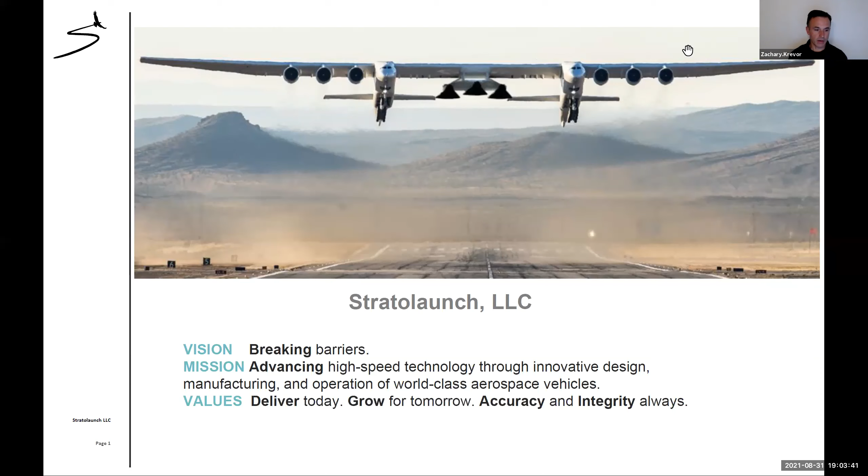So Ken, if you could go to slide 2, just a little bit about us. We have transitioned from ownership under Mr. Paul Allen. Our current owners now are Cerberus Capital Management, a private equity group that owns us. What we are trying to do is bring hypersonic test services to the aerospace community. We're fully funded through hypersonic flight tests. I think a number of folks are aware our facilities are out at Mojave Air and Spaceport, that is now our headquarters. We have transitioned from Seattle down to Mojave.

And as mentioned, that's our offering down there, and we have two great folks here to talk to you about quite a few more details. If you go to the next slide, Ken. I'll help Ken moderate here. Really, probably right off the bat, the immediate question: when are we going to fly? The goal is to fly the carrier aircraft again later this year, and the goal is to start our hypersonic flight tests next year. But all bets are off with COVID, just like everybody else - we've been significantly impacted by COVID, so that's my caveat for us there.

So we flipped around the agenda a little bit due to the flow, we have a lot of slides. I'll help Ken moderate it here. I think folks will hopefully have a very interesting time. I know we talked, I think 2 or 3 years ago, with one of our younger - I'm not supposed to say that, I guess, less experienced - engineers, but folks will hear from both Mason and Evan, who've been with the program quite a bit and were instrumental in the first flight. I think folks will really enjoy today's presentation. So with that, Mason, why don't I turn it over to you? Let's get going, I'll stop talking.

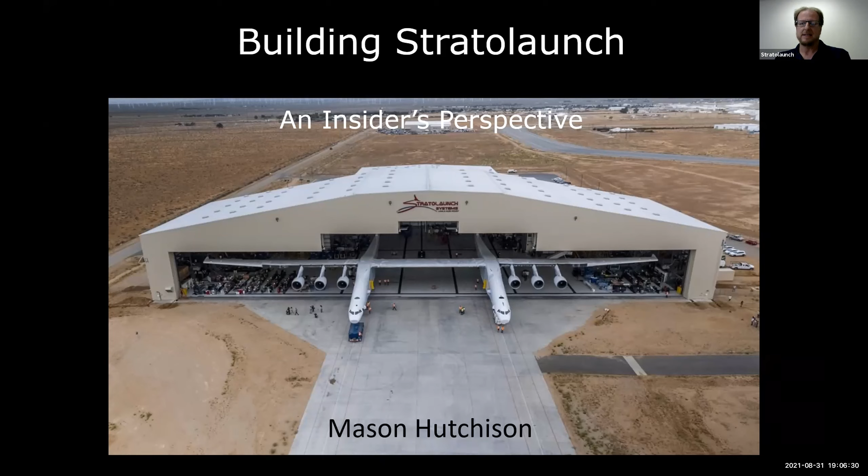I came on board designing the mechanical flight control system, and I've been here since the very first roll of carbon fiber fabric showed up to build the airplane, all the way through to today. So I've been present for each of the 2 flights and involved with the design and build of the airplane every single month of its progress.

I am a lifelong aviator and have got my roots in working in Mojave with Scaled Composites. I have a lot of experience working with landing gear and systems, so I'm a systems designer.

And what are we here to talk about tonight? I am passionate about the Stratolaunch carrier aircraft and being an engineer on the program. I enjoy getting to work on all areas of the program.

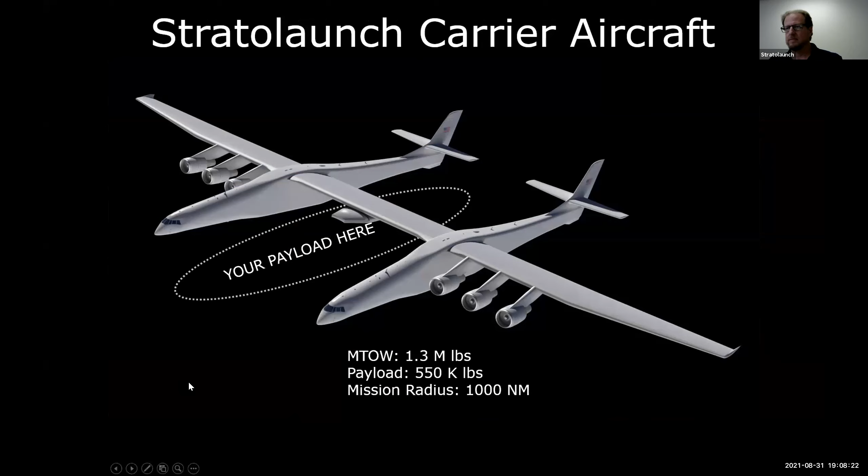So what's the purpose of this aircraft? Simply, your payload goes here. The original design of this airplane was to haul a payload, and it's an air-based launch platform that will make access to hypersonic test conditions more convenient, reliable, and routine. The payload is centrally located between two tall fuselages and under the wing, giving it the clearance for large payloads such as rockets to carry at a high altitude.

The baseline launch mission, when we first designed the airplane at the start of the contract, was to reach the capability of taking a payload on a 1,000 nautical mile radius. That includes two opportunities to loiter, before and after the release of the payload.

The Stratolaunch carrier aircraft, from the start of conceptual sketches until the first flight, was intended to carry rockets to an advantageous altitude that would allow for launching from flexible locations. That's the big advantage. The current program won't require the pull-up and release maneuver that you see here, but understanding the safe separation and careful mitigation of the associated risks with separation is where Stratolaunch shines.

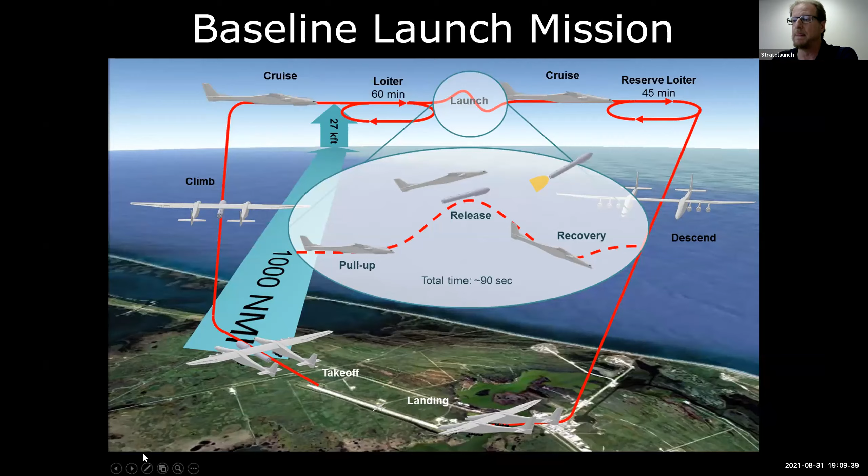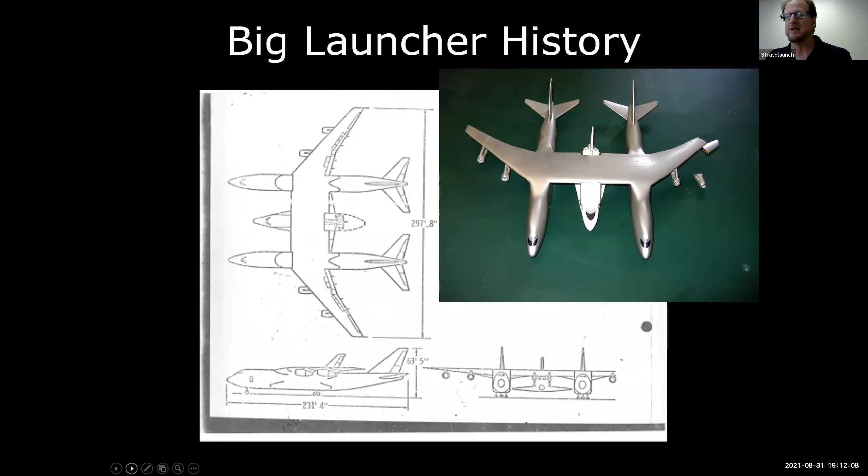So the top launch was deemed risky and more variants were offered in the process. Here's a shuttle carrying concept that moves the wing of the 747 to a high wing position, and notice there's a straight section in the center line span to simplify that connection. But still, extensive structural modifications is the obvious obstacle to this concept. I found this as a wood model on eBay that I really tried to win and I actually lost - neat little artifact.

So as the launcher progression of the history of launchers go, there became an economical aspect to building them. In this concept from 1974, as the shuttle is progressing, this was called the Conroy Virtus - fairly popular, searched on the internet. Hershey bar wing, which was theoretically easier to build and better for range. But this was a twin fuselage derived from B-52s and used the jet engines off of the B-52. Conroy said at the time that this would cost $12.5 million to build, which I say to that, sure. But look at that wing configuration - he's onto something here. And this theme you'll see play out as we go.

So let's talk about the evolution of launchers, and the evolution of this concept and design, from Burt Rutan's sketches all the way up till today. The configuration that we're flying actually takes an interesting path. I was able to gather some sketches that were made, casual ideas that were just archived over the years.

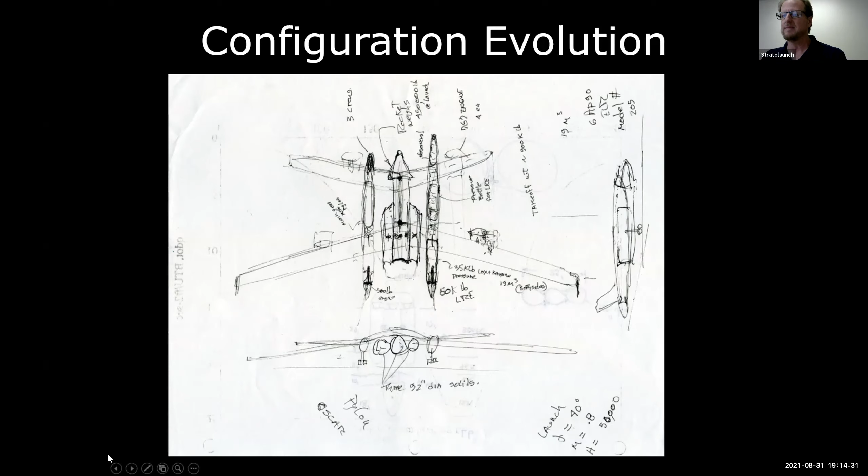Here's another iteration of that. Notice the SpaceShipOne sort of configuration - there you can see a SpaceShipOne, SpaceShipTwo style. But look, the crew is in the right-hand side of the right-hand fuselage, and we're starting to see ideas of how to reuse very complex systems like the engines and their nacelles. So you can see the spaceship platform emerging in this design.

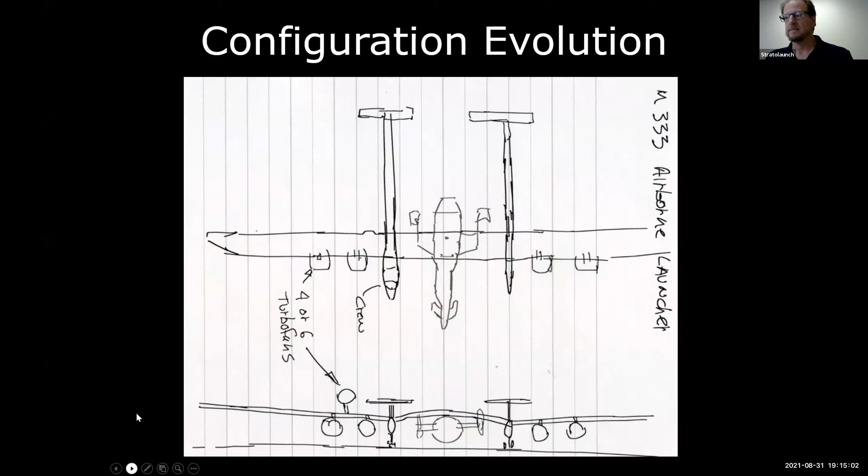Here's where it starts getting real. This is when more than Burt is just working on this - this is actual engineering applied to these ideas.

You start to see in this configuration there's a 277-foot span. We're reusing 747 nacelles, but the big concept here, the big breakthrough, is that this is going to start to reuse the major airline systems and components. That is the winning combination of this configuration.

Notice the crew layout in the right-hand cabin. There's actual thought Burt's putting into how the crew resides in that cabin to better accommodate the experience, and that persists throughout all of these.

So now that we're getting into this concept, we're starting to talk contracts, getting more of this. This is August 2000 - we're getting more serious, and we can tell because we've got a 3D model now, which means more people are working on it. Notice here in this configuration, minimize wetted area, but look at that landing gear.

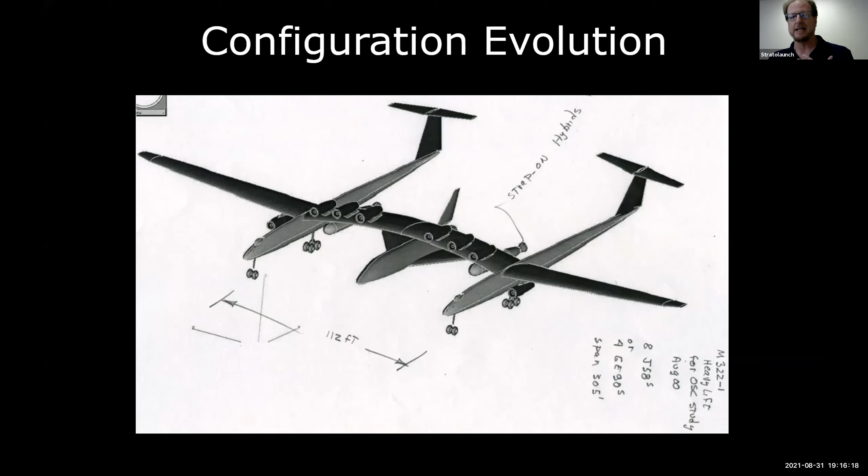That custom landing gear wouldn't be available from any donor aircraft. It's just too tall, and very clearly is going to have some cost issues. This note is from the 2000s again, this graphic.

So moving on, here's another pencil sketch that comes out. I showed this one because I think this is a very important sketch that Burt did.

It's not that Burt is simply a great aircraft designer - his approach to design is mission-centric, which identifies ways in which he can utilize unique design to fulfill the mission. It's not uniqueness for the sake of being unique; it's uniqueness to achieve a goal.

So Burt details here what he deems risky aspects of this design. The ground crew on board is in the nose. G-transients for takeoff and landing, and crew egress issues - he's addressing that here with the crew sitting up in the top of the vertical fin, at the joint between the horizontal tail and the vertical fin.

There's electrically signaled ailerons, because he's already identified that mechanical signaling through the tail and fuselage to the wings would be complicated. This one has a crew bailout configuration that allows a flyback vehicle. So there are some interesting concepts happening here. Also, the Bronco tail is really mostly for signaling runs, not necessarily structural in this configuration.

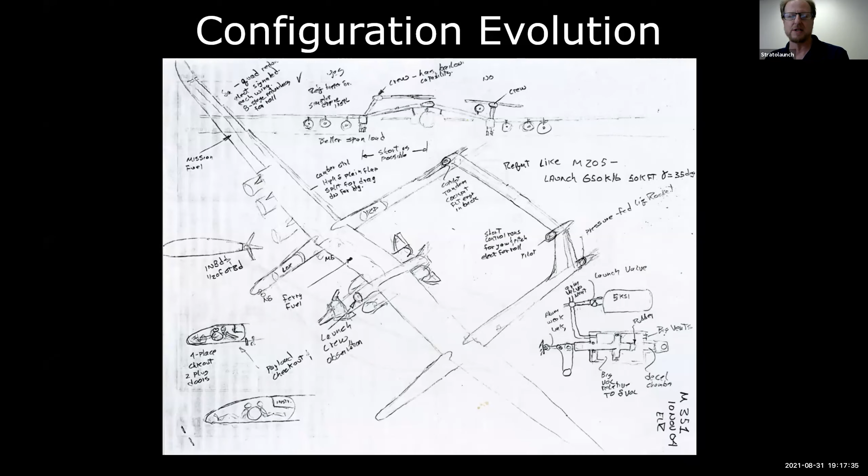So because we're Stratolaunch, and we are constantly looking for ways to advance schedule, that concept gets evolved into 6 engines - 6 747 engines. Notice the V-jet idea, which is an original scaled airplane.

The tail, top of the fin, has the fuselage from a jet that was previously manufactured. So there's a money-savings concept for using tooling from previous programs as the cockpit, sort of the crew station at the top of the tail.

Two SpaceShipTwo rocket engines for JATO-type takeoff, and a tapered outboard wing. This is where the donor starts to be targeted as the 747 in a serious way. This starts to get rolled into the plans and the concept for building.

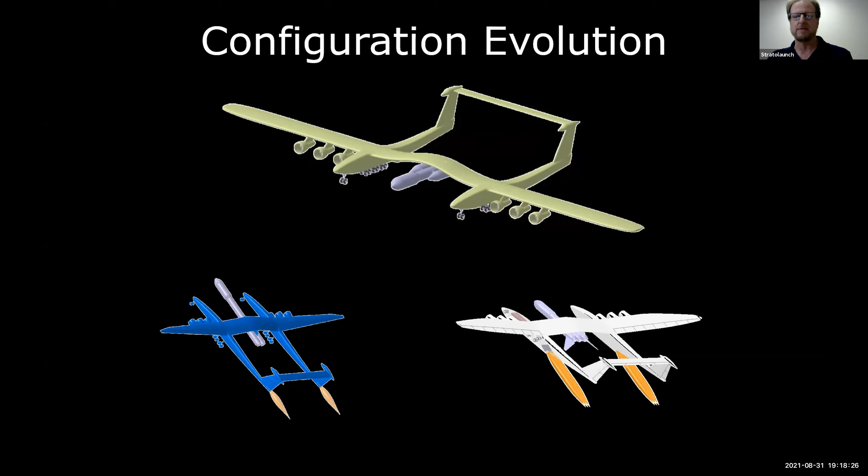So at the commitment of the contract of Stratolaunch, this is what the configuration was agreed upon. You can tell we've got a lot different jet now than in the days past. We've got the same outboard wing taper still, as you see here. The wingtip scheme is the same.

The engines are in the same place, but we didn't go with the Bronco tail. Many trade studies showed it actually was heavier than our 2 cruciform tail configurations that we have now. Multiple trades concluded that. Note the cockpit placement at the top of the fin. I like this particular concept because at this point we were toying with the idea of crew egress being an emergency slide through the vertical fin and out the bottom somehow.

That's completely unusual and out-of-the-box thinking that kind of made this advance. So as time passes and the design matures, we get to this configuration.

This was seriously traded as a configuration that would have the range and lifting capability, but we start to see complexities with using the systems. And we start to see economic issues with a curved wing section in the center that would be hard to build and expensive to build.

It's also interesting to note that these are modeled with basic-size 747 landing gear. So you can see this is a very large aircraft.

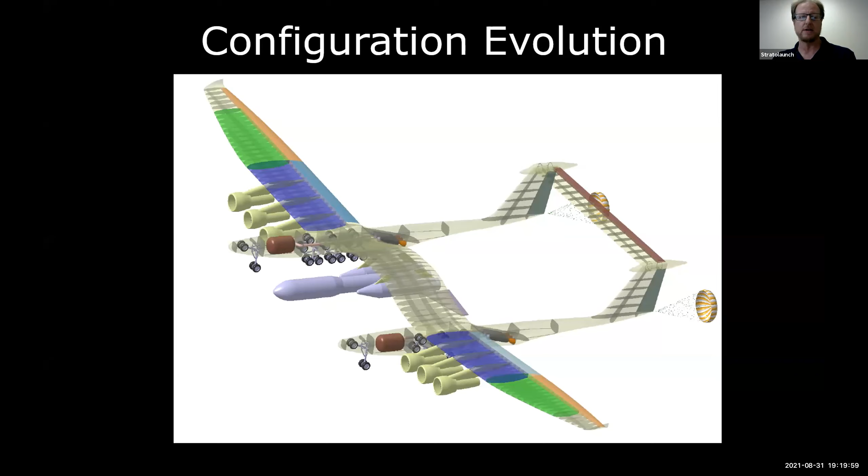Advancing in time, here's what we called the Horseshack project. It's a paper study that we use to bring our current configuration to finality. You can see the adoption of the 747 forward fuselage, the reuse of the windows from the 747, the engines, their nacelles and their pylons.

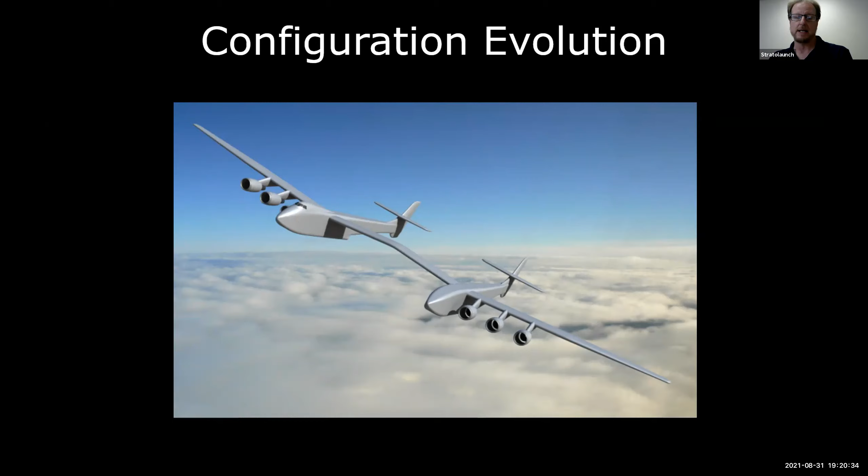And we've got the high horizontal tail in a cruciform configuration. But we have 2 different mold lines for the fuselages left to right. We'll talk about that in the next one.

So here we are today. This is our loft and our design outer mold line that we use to design the airplane. At this configuration, we have the launch pylon in the middle, just like all of them, but now we have identical cockpits left to right.

But for systems and for the control, the pilots have always sat on the right. That's been a carried-through configuration that we've not changed or challenged the entire time. But there are also reasons for that, such as reuse of the 747 windows into our loft, which I've always been impressed with—that we were able to reuse the transparencies from a 747.

So what is this aircraft now? How big is it? I like this 3-view because it shows we're 385 feet wingspan, 238 feet long. Max design takeoff weight is intended to be 1.3 million pounds. We haven't tested to that point yet, but we are definitely using the airplane with the intent to build up to carrying more weight eventually.

The current mission is not nearly the payload that was originally anticipated for this airplane, but the system complexity is challenge enough. The mission radius was maintained at 1,000 nautical miles and a balanced field length of approximately 10,000 feet.

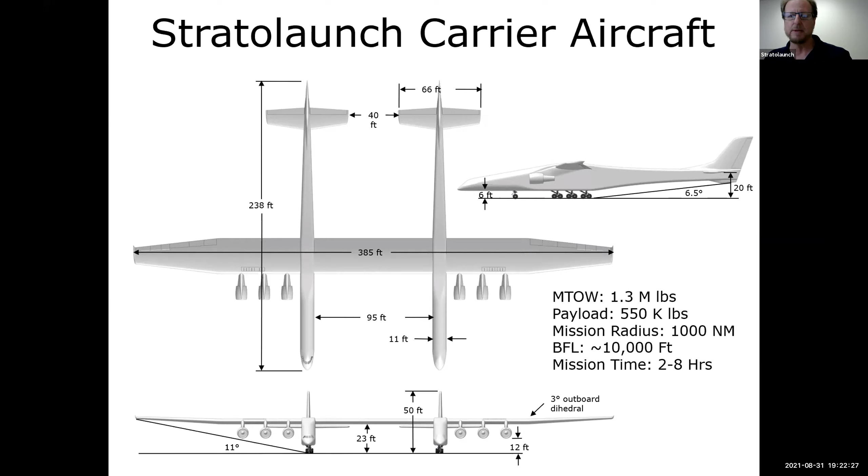We think that we also have the world's largest single aircraft component, which would be the wing spars, which are only partial span. They go from the dihedral break or the planform break to the other planform break. We have not been informed of any other piece bigger than this, but they are approximately 250 feet long each, the spars and the wings. So we think that's the single largest aircraft component ever built. We'd love to hear from you if you have a challenge to that.

All right, has anyone ever seen this chart? I like this chart—someone did us a favor by making it. I found it on Wikipedia, and it shows this Model 351 Stratolaunch overlaid over a 747, and at the same time, the Hughes H4 Hercules. We beat the H4 Hercules by 65 feet, incidentally, a number that I don't ever forget.

Here's a look inside the Stratolaunch aircraft as it is now, and you can ignore that payload in the middle. I grabbed this drawing because it really does show what our system's complexity looks like. There are 4 hydraulic systems, almost a quarter statute mile of control cable.

Each engine has an air-driven hydraulic pump, an engine-driven hydraulic pump, and an electrically driven hydraulic pump, together making more than 200 total horsepower of hydraulic service to the flight controls, the landing gear, and the braking systems. Each engine provides electrical power, and they pump it into 2 massive power bus systems that meet at the center wing.

No, it is not possible to access the fuselage or convey through the wing while in flight. The pilots are sequestered only to the pressure vessel of the right forward cabin and are unable to actually transfer into the fuselage while in flight. But that said, you cannot walk through the wing either. The wing is only about 5 feet thick.

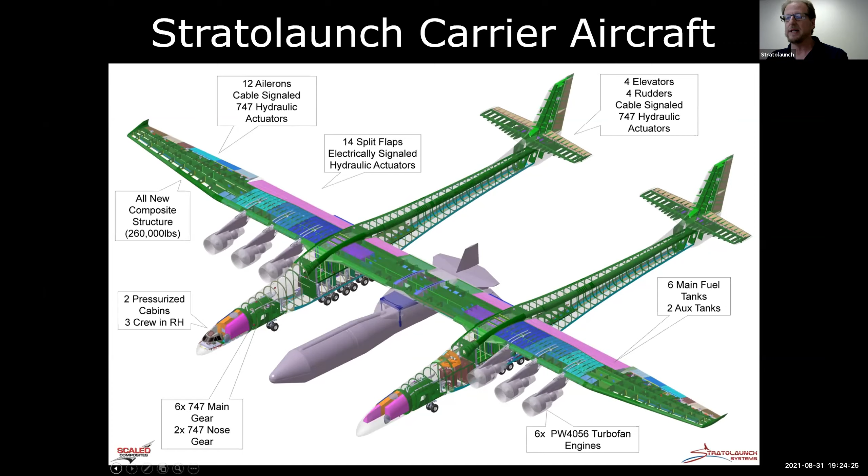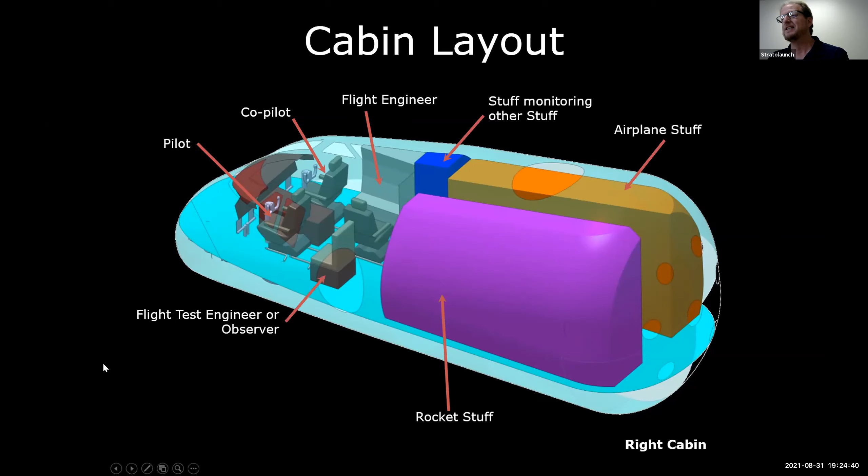Definitely a benefit. Here's the cabin layout, and it's pretty simple. It follows the basic 747 layout with a pilot, co-pilot, and a flight engineer, and other stuff monitoring other stuff. We call that airplane stuff. We call that rocket stuff. Literally, these are the support systems for the payload and the experiments that can happen on board.

We have an optional seat for a flight test engineer observer. We haven't put that in. It's just kind of close to the door. And of course, we tried to build a lav for the pilots. Sorry about that, we just ran out of time. So instead, we got a TravelJohn.

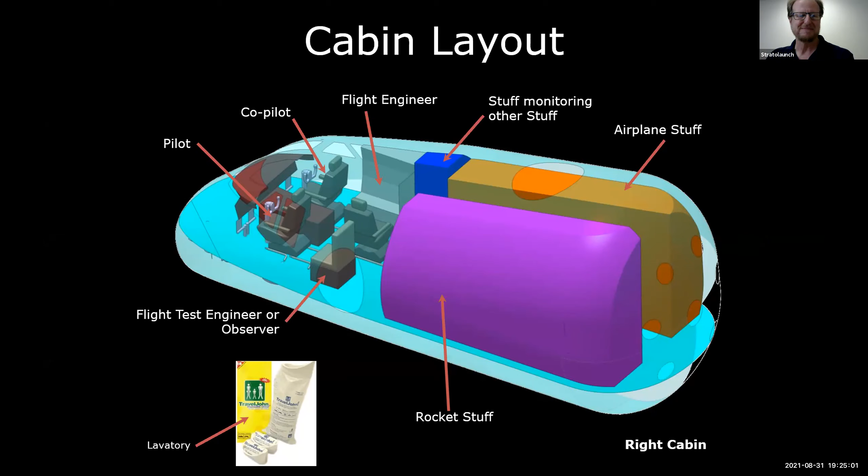So where were these airplanes originated from? Parts birds. We bought 2 747s, lightly used and in good condition. We wish they were from Craigslist. We like to say they were, but they were a little bit more legit than that.

We accepted the airplanes in flying condition, and the day they rolled in, had a company meeting on board. It was very intimidating because we stood there looking at the airplanes, wondering, knowing we have no business harvesting the systems out of these massive airplanes and putting them in something so big. Having been, White Knight 2 having been the largest aircraft any of us had ever built.

Of course, we took many of the flight deck components, and in the end, this is what our parts bird looks like before they get hauled to the boneyard. No engines, very few systems, and minimal landing gear to transport it.

The 747s donated their entire cockpit floors, controls, seat rails, instrument panels, and they eventually became the simulator, the cockpit floor in both cabins, left and right. We used the same yokes and rudder pedals from those harvests. And these are how the donor airplanes were, their fate. They were sent to the boneyard and reduced, as they say. Only one exists today, and the other one is basically gone.

So I like to go through 4 basic tenets of building Stratolaunch, and this is an effort to show kind of the basic philosophy that we had while we were on this massive, overwhelming project. Number 1, keep the requirements focused. This elevator goes to this horizontal stabilizer. That day, we mounted these 2 and set the hinge line.

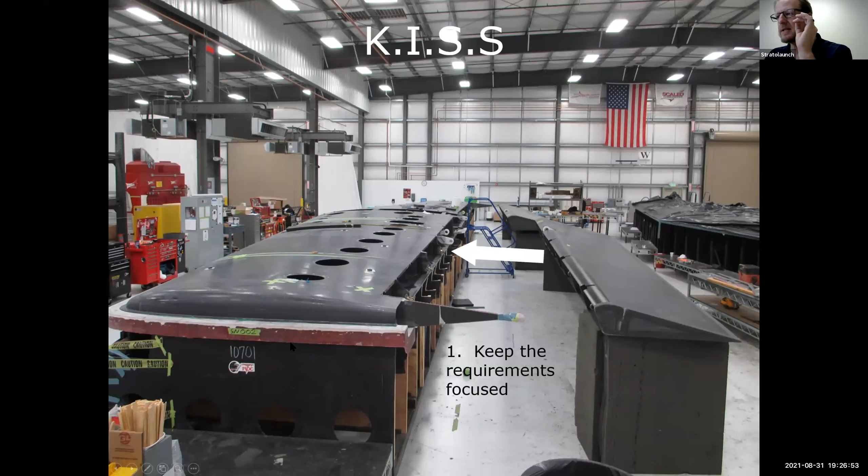Simple, clear requirements. Build flat parts when you can. Curved parts are hard and take tools and take time and expense. Flat parts, you can make them over and over again on the same table. So that kind of explains why the fuselage sides are mostly flat.

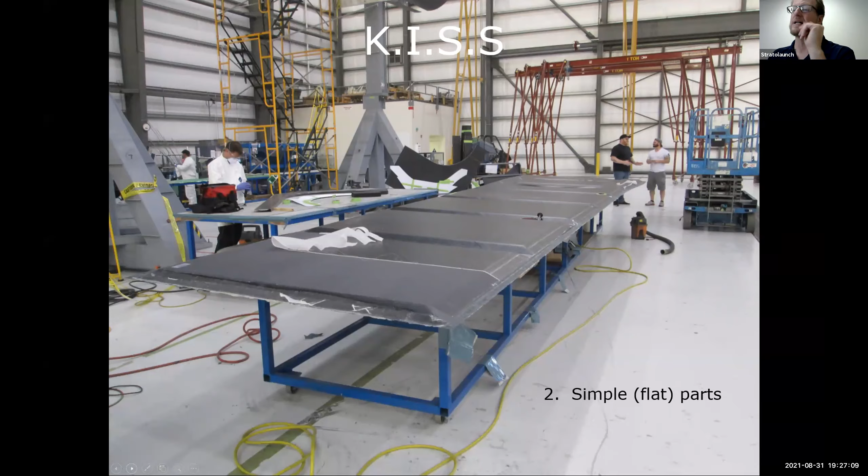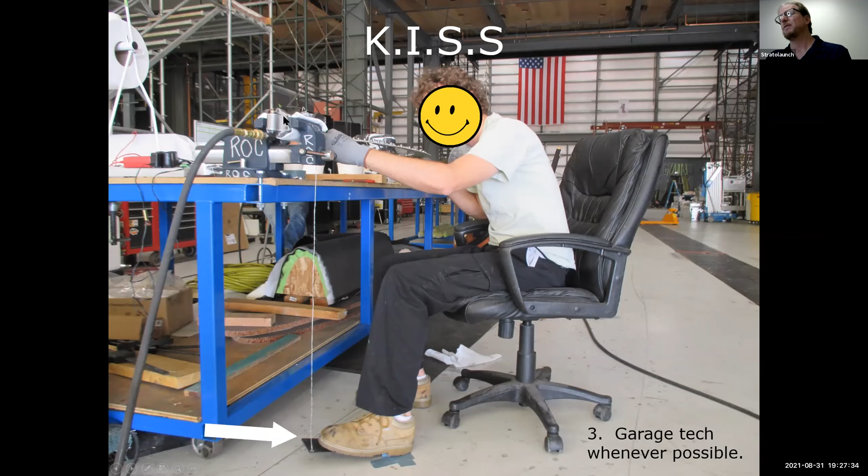Use garage tech whenever possible. This is one of my favorite images because when tools need modification, they need modification right away, and we don't like to wait on new tools. And what good is a brand new rivet gun in the tool crib if it has the wrong configuration? Make it the right configuration and get the job done. Notice the pedal actuating a rivet gun with a string that's duct taped to the floor. One of my favorite modifications of tools.

In this photo, you see a spar cap that was over 250 feet long, part of what we think are the largest aircraft parts ever made. It was very long and floppy.

It was nearly impossible to flip upside down. So someone smart came up with a machined foam wheel that had facets that we could roll across the floor and work on any side of the spar cap that we needed, without putting undue torsion on the part itself. Pretty great idea. So those are the four tenets of keep it simple.

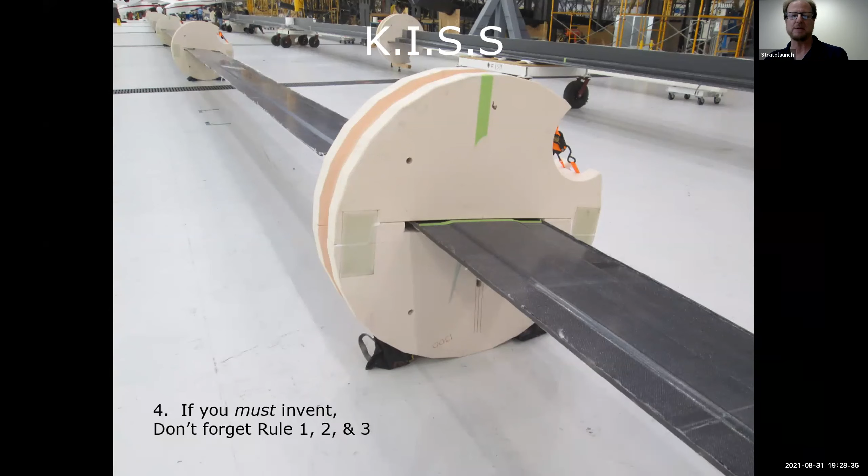Let's talk about the assembly of this. I'm a model airplaner and I look at it from that point of view. We put this airplane together just like a model. That part goes there, pretty simple. And it was a daily occurrence to see huge parts go into place.

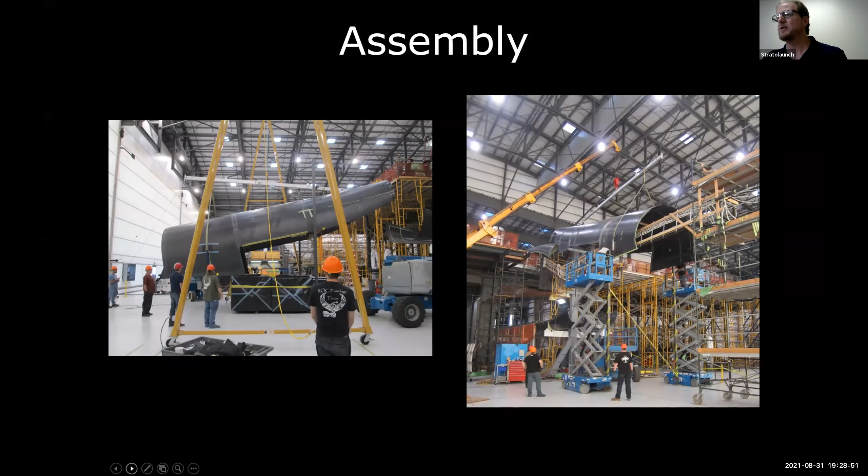In this picture, you'll see the tail section, the entire tail section, vertical and horizontal, put together as an assembly first on the floor, and then as one giant assembly moved into place in a very impressive lift. We did this twice, once for each tail.

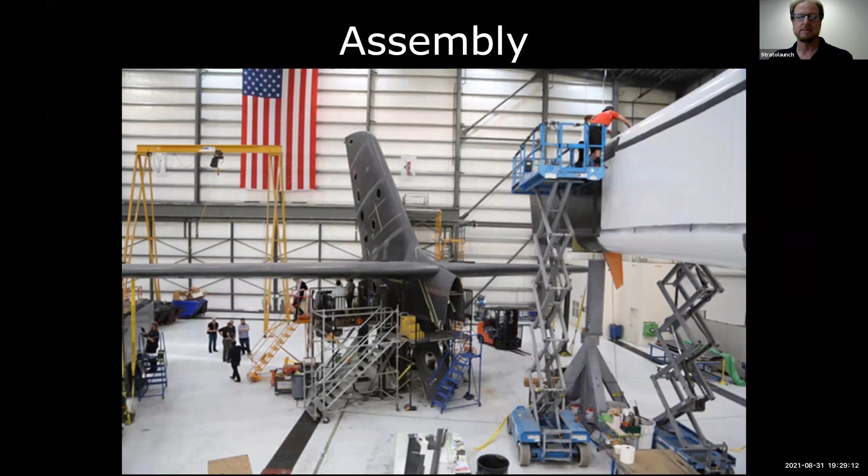Just for scale, I love this picture. Looking down, we actually had a drone in the hangar this day, and this just shows a couple of people standing there for scale. Walking on the wing was a routine, everyday way of life, and it became so routine that we often forgot we were walking on an aircraft structure.

Also, when you adopt systems from well-used airliners like 747s, reusing the engines and nacelles means you get to use the commonly available hoists and engine lift hardware for installation and removal. But oh wait, the 747 has dihedral, and these hoists needed modification to make that work. So, oops, you learn as you go in this game, and that was one of the fun lessons I was most admirable of, how they adapted to the lack of dihedral in our installation. They still use those engine hoists to this day.

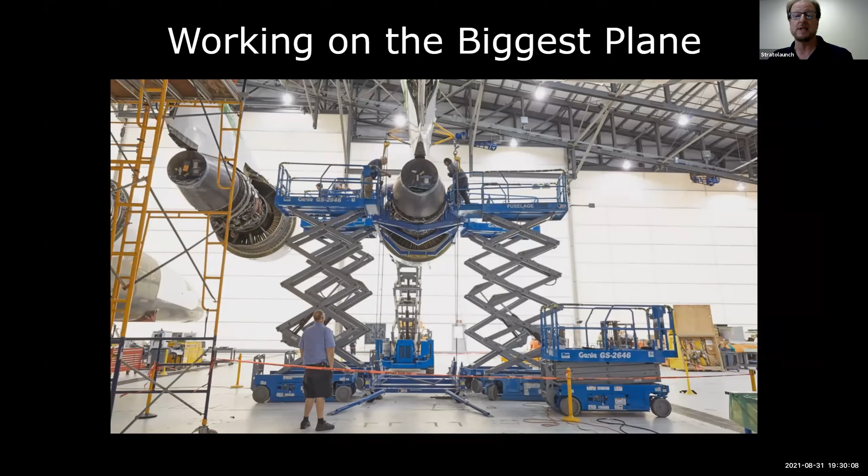Also, simulating this airplane is a big challenge. It started off as a basic sim in the hangar, and we made it bigger by trying to add in the instrument panel and other cockpit elements. Today we've settled on a fixed base simulator inside a hemispherical projection dome, and it works remarkably well. It's so interesting how the brain and the ears just feel like you're flying in that. The systems are quite well represented in our simulator, and it's used all the time for pilot training, proficiency, and also proficiency in our control room.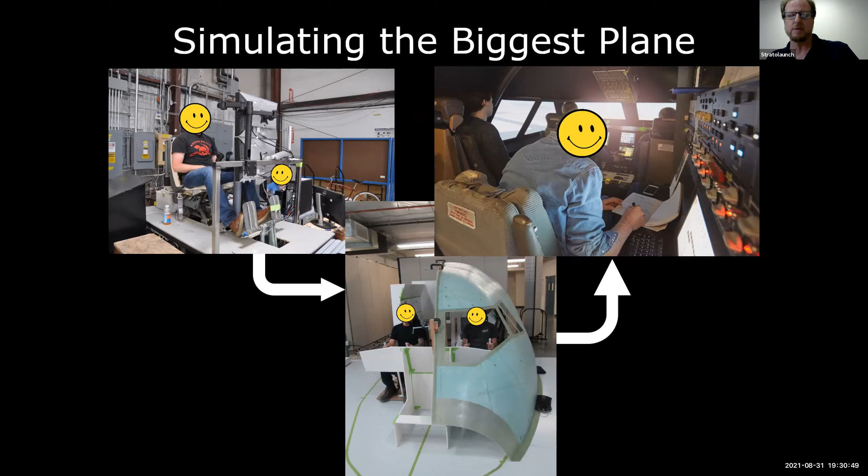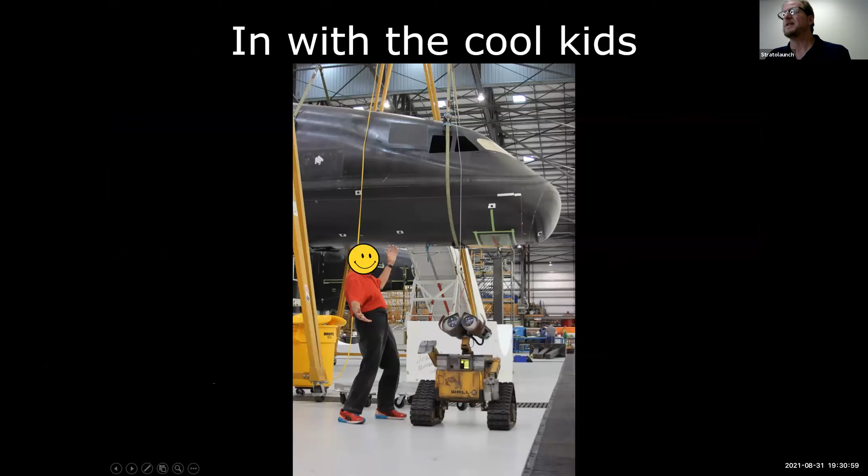Let's talk about the hardest parts of building this airplane. This is the last part of my presentation.

The wing was built thin for range and straight for cost. The biggest challenge of this airplane was the wing root and the design of that wing root. The maximum bending moment is equivalent to one elephant mile. If you know the concept of foot-pounds and torque, the elephant mile is a massive amount of torque, and that's an adult African male elephant, by the way. We had to qualify that once.

Also, some of the hardest parts is understanding how this airplane is different from others. It's what makes this job interesting. On the first rollout shown here, we were very concerned with skin temperature from solar heating. So we placed tattletale thermometers all over the airplane in this picture, and that experiment happened just on the rollout of the aircraft.

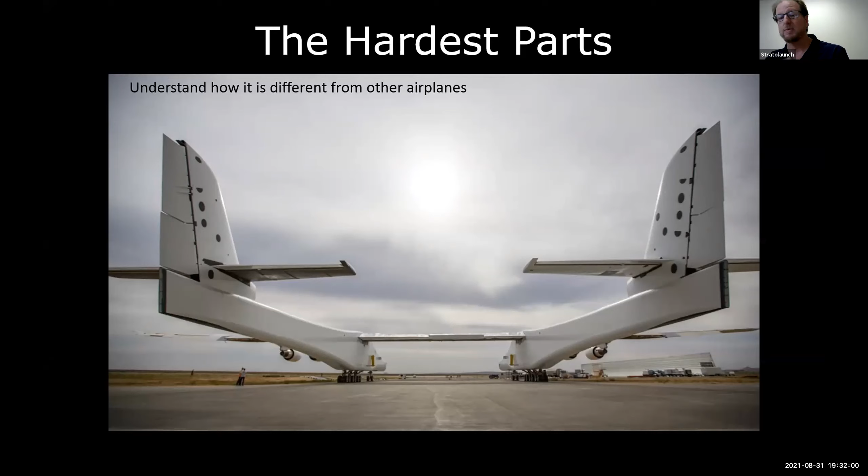Another hard part of building this airplane is moving the airplane. This was set up as kind of a joke, but it's actually something we talked about, moving the airplane by using a crew of people with a rope. It was floated.

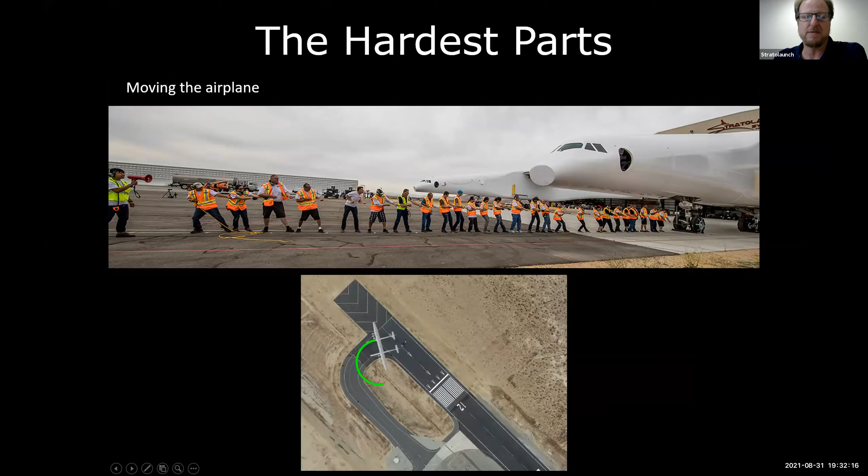Accessing the airplane - I like to show this picture because it shows I actually took this picture from the other tail, and I'm up in the high scissor lift there. It was actually hard to find scissor lifts that would reach the top of our tail, and when we did, we had to get the ones that went really high. So there was this confronting of fear of heights, and I actually went through that on this program. I went from hardly being able to climb up a ladder to being able to ride the scissor lift up on a daily basis.

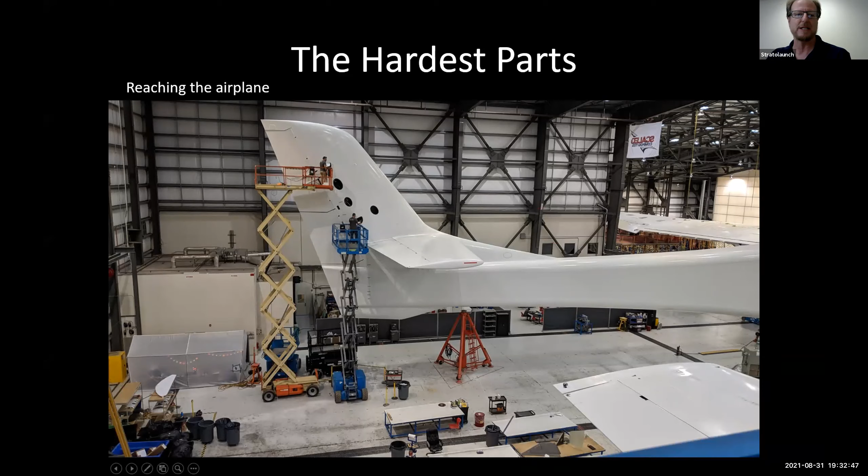We had to develop an entirely new body of technology and use that technology concurrently while we built. In the image on the left, those pins are 4 inches in diameter, and that's a shear load test for one of our wing sections. Probably, I think that's a shear panel, actually. At the bottom, you'll see the semi-truck trailer used just to move the wing test article.

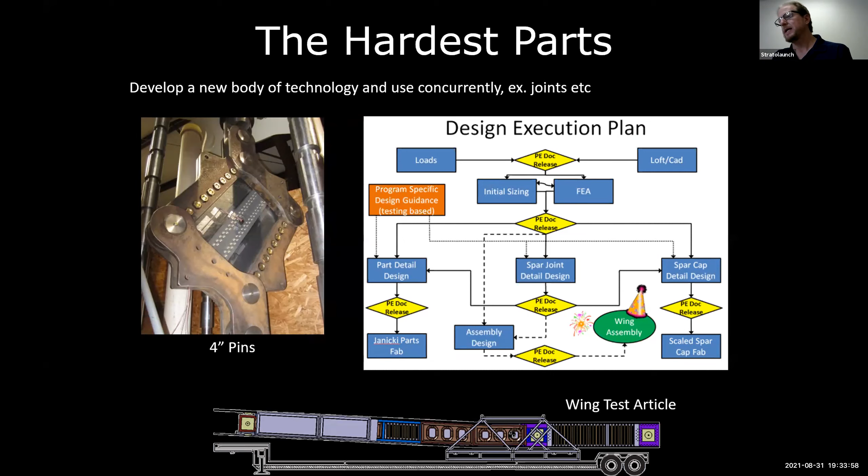So designing the systems for which we build things became part of this project and really took on a life of its own.

And of course, the big emotional paycheck. It happens that every day we live a life of being constantly behind schedule and needing to make many, many decisions every day, but there has to be an emotional payoff. Very clearly and very distinctly, first flight was that day. 2.5 hours of flying, 17,000 feet, and one fantastic landing at the very end. And truly, this is, in conclusion, the payoff, and this is why we do this.

So what's next for Stratolaunch? I'm just going to touch on it. We thought we were done building the airplane. We're not. There's still plenty more to go. More systems expansion, capability testing. We've got plenty of ground tests ahead of us as we implement a launch pylon and a hypersonic payload.

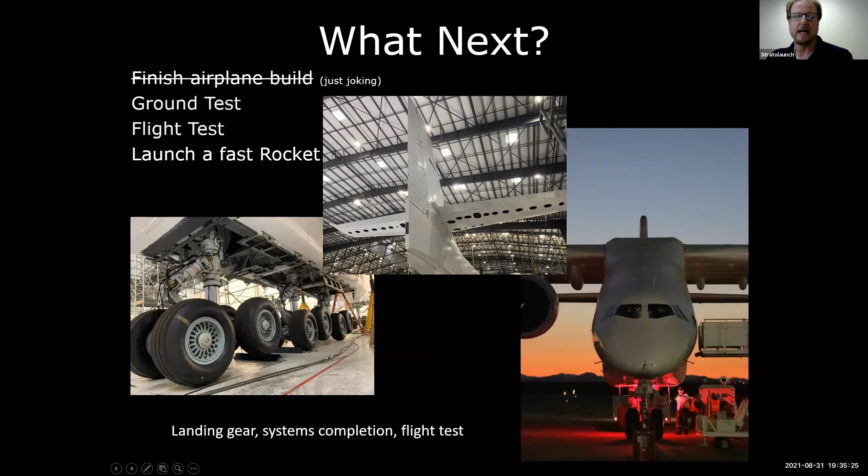We've got plenty of flight tests associated with that. And then in the end, we're going to launch a fast rocket. And that is going to be one fantastic day.

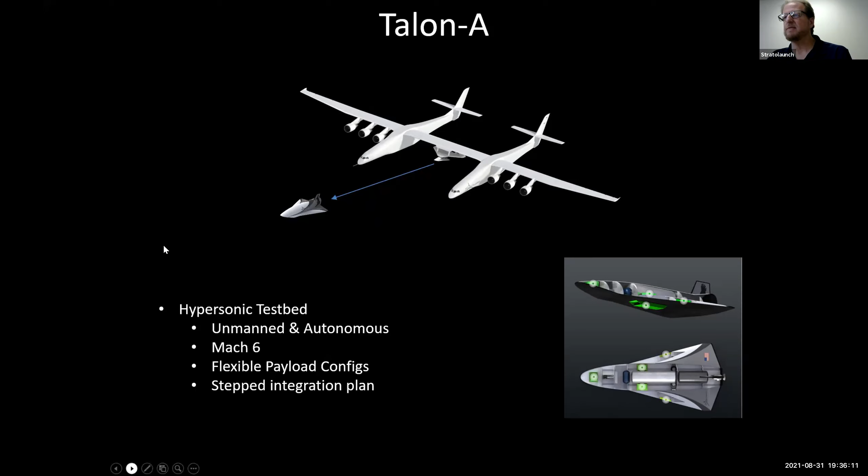This is my last slide. I just want to say that this is just getting started. This really does demand an entire presentation of its own, but this is a basic overview of what our hypersonic mission is. And with that, that is my last slide, and I am ready to hand over to Colonel Evan Thomas.

Just excuse us for just a minute while we switch seats.

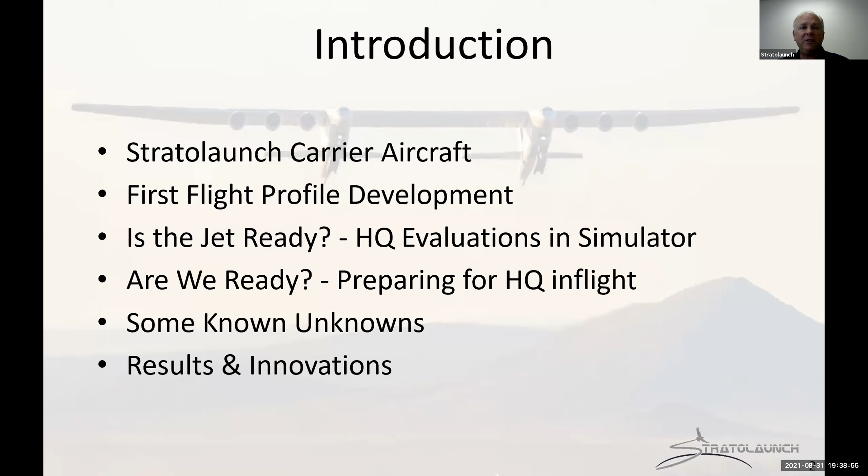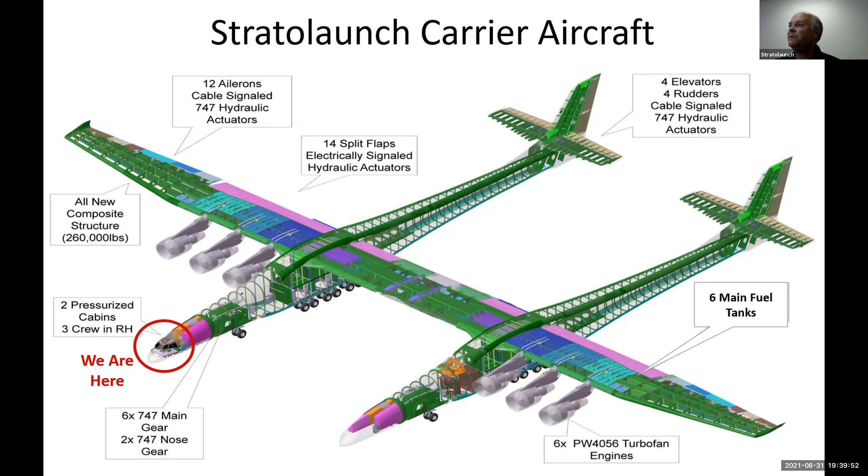In terms of flight controls, I'll go over this in a bit more detail. For the first flight, all of our flight controls were mechanically signaled via cables—cables running from that right cabin all the way out to both empennages, all four elevators, the four rudders, both banks of outboard ailerons on both sides. So a lot of cable. All the flight controls, of course, for an aircraft this size, are hydraulically actuated and irreversible. As a review, we have basically two elevators and two rudders per fuselage, and then two banks of ailerons on either wing.

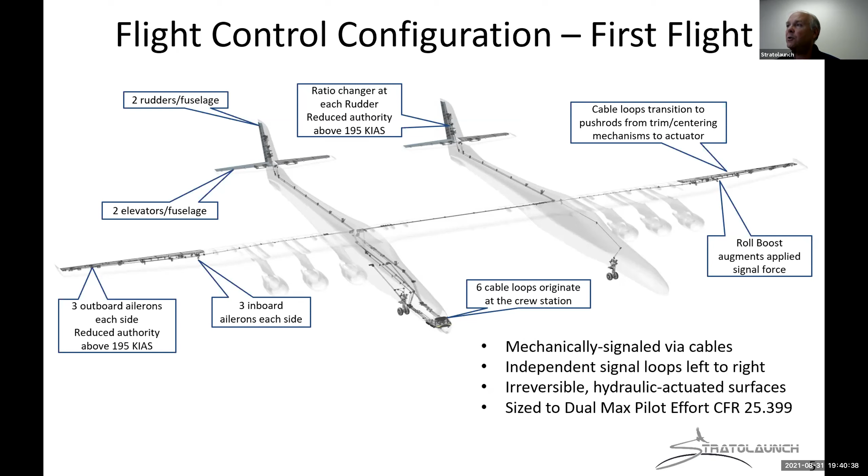So the first flight really had one objective, like all first flights, and that was to land safely. We had a bunch of other sub-objectives, but really that was the main objective.

The risks we looked at for the first flight—the primary one was landing this airplane quite wide on the runway, so runway departure on landing was a big concern. But also, how was the airplane going to fly for real? So inadequate stability and control, the possibility of getting pilot-induced oscillations, and then also, it's a very large carbon structure, so the possibilities of getting some odd structural vibrations, biomechanical feedback between us and the aircraft and the control inputs, and then pilot perceptual concerns of sitting there out on the right fuselage way out in front. Ultimately, the first flight was about: can we precisely control the aircraft to a stable, centered landing?

Going again on that big landing challenge—we've got a 200-foot wide runway here at Mojave, and it's 114 feet from the outside of one set of main landing gear to the outside of the other set. So we're pretty wide there, which gave us about 43 feet to either side to play with. Again, we're a bit like a shopping cart—two nose gears up front, and then inline main landing gear, three trucks worth of six tires on each line. We also come into the flare a bit nose down, sort of like a B-52. So that concern was such that we didn't want to land nose gear first and start porpoising—not only fore and aft, but potentially side to side as well. That would be a bad thing.

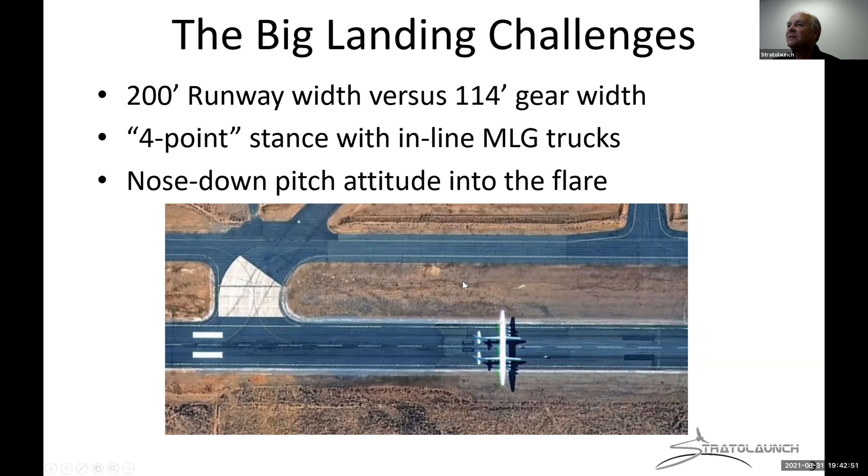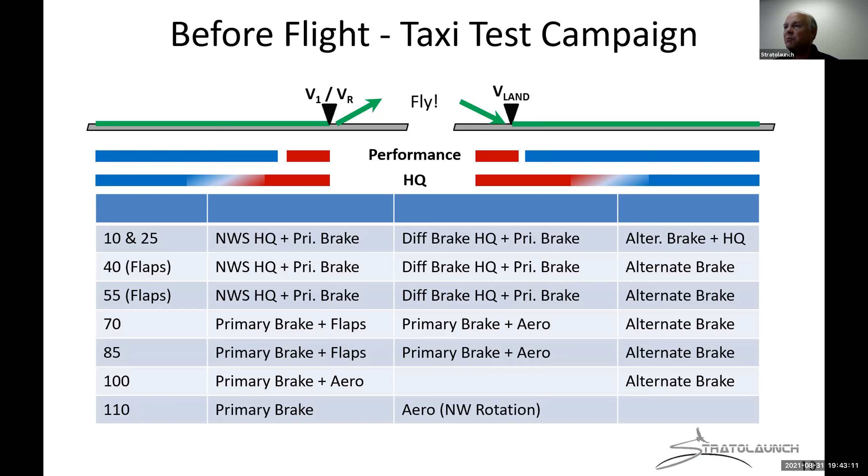I was going to talk a little about our buildup in taxi testing, but I think I'll just skip ahead—in case there are any questions about that later, we can double back to this slide. Needless to say, the taxi test program for this airplane was not just 'let's take it out a few days prior and run it down the taxiway.' It was a fairly long and involved process.

So it came time now to think about this first flight and what we wanted to do. We started with handling quality evaluation basics, which has four primary steps. First, you want to do thorough ground tests so you understand your system, the flight control system. Next, when airborne, you want to do some open loop responses, see what the aircraft's natural response is to inputs, and some basic capture tasks, bringing the pilot into the loop. Then you want to build up to doing high gain, intense, quick, rapid inputs to do a stress test—that's where we're looking for what we call a handling qualities cliff, or any sudden degradation that would be very bad to learn about right during the landing. So we want to look at it up and away at altitude. Finally, you'd normally assess the handling qualities and workload for mission suitability—but on a first flight, we did not care about that, so that one was off the table.

This essentially led to a basic profile: we're going to climb to 15,000 feet, a nice comfortable altitude, 150 knots. We take off with the flaps up. We're going to do pitch, roll, and yaw maneuvers to check the handling qualities—nothing high gain, flaps up. Then we're going to put the flaps down, which was a significant test point to get done. The flaps, by the way, have two settings, up and full down, which is 70 degrees down. So the flaps act as flaps, but they also act essentially as speed brakes.

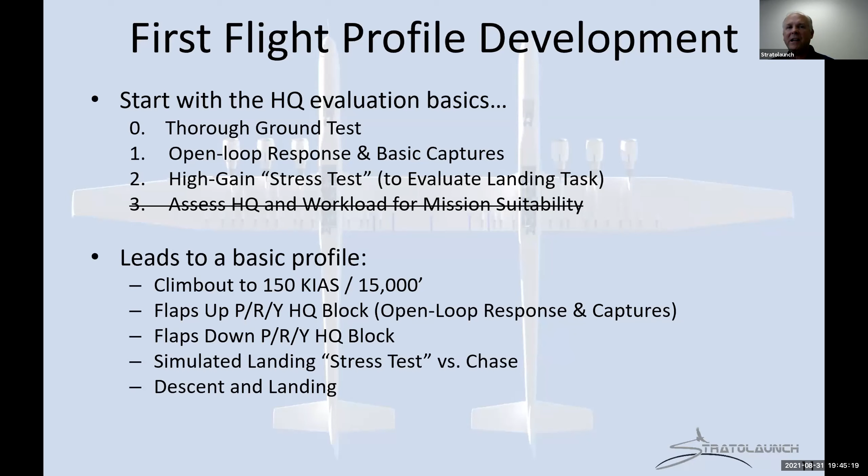Once the flaps were down, then we were going to do our simulated landing stress test. Typically, you would use that with your chase aircraft as a target out in front of you, and then descent and landing. As we started thinking about exactly how we're going to do this, it became rapidly obvious that this was going to be an iterative approach.

So we have our standard approach, but there are a lot of unknowns here, and one of them is our air data system. Is it in any way accurate? We sort of need to know that before we come back to land. So the first thing we needed to do is add some pacer checks in here to check the pitot statics and look at our predictions. How is our AOA prediction, our coefficient of lift, our trim elevator settings? So we want to look at those, both flaps up and flaps down.

Then next up, we said, if we have a problem early in the flight, we want to get back on the ground quickly. We want to get the flaps down. But before we put the flaps down, we want to make sure we have enough roll authority in case we have an asymmetric flap or some sort of problem with the flaps. So that meant we had to put right up front: we'll do our pacer check, but then we need to go check our roll authority and our roll handling qualities. No problem, we'll just rearrange the plan and put that in place.

Then when we started looking at doing these roll maneuvers, the roll authority maneuvers, where we're essentially doing them both feet on the floor with some coordination, we realized there was a potential to build side slip there, which we had not looked at before. And doing an open loop side slip maneuver was not a safe or smart buildup. So we'll add in a flaps up, wings level side slip to take the airplane to the maximum side slip we predict we'll see in the roll handling qualities. And then we'll do our roll authority check, and then our handling quality check, and then we'll get the flaps down. So you can see how this profile slowly built over time.

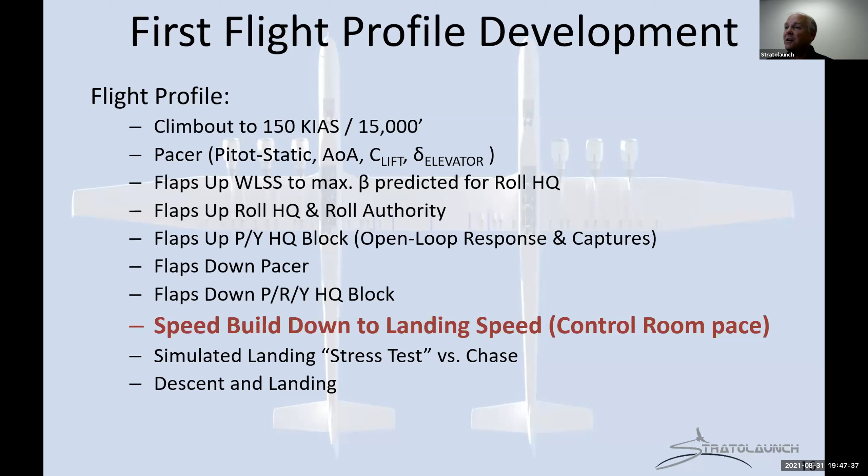So that came in. And then the next thing was, how do we add a little more stress to this stress test, or make it harder, more like the actual landing? I used to work with a guy who always said, when we're looking at handling qualities, if something's worth looking at once, it's worth looking at 3 times. So we upped the number of simulated landings we were doing at altitude. We threw in a side slip component during those simulated approaches. We got rid of the idea of doing this off of chase because we're just far too big and it was a little too scary for all of us. And we also added in some planned low approach, one low approach with the option to do other low approaches prior to the landing.

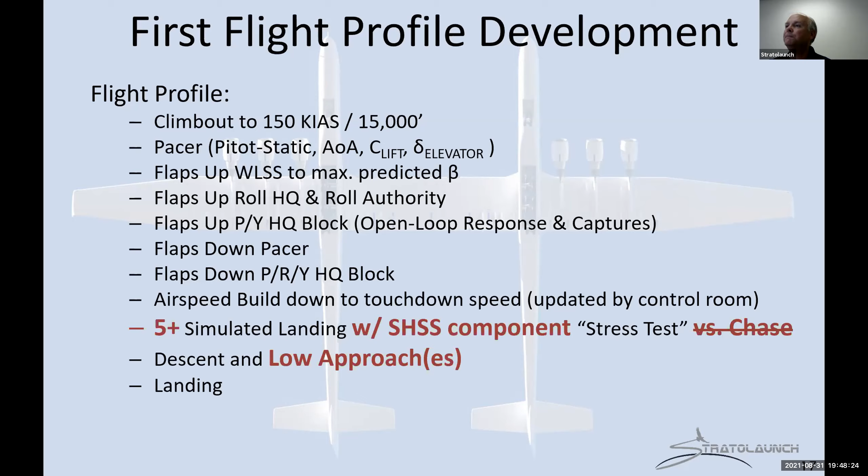So that's what the essentials of the first flight looked like. We drew some lessons from that process. Number 1, on a first flight, everything's an unknown. And lesson 2 from the aircrew side: follow your instincts. What scares us the most is what we want to look at.

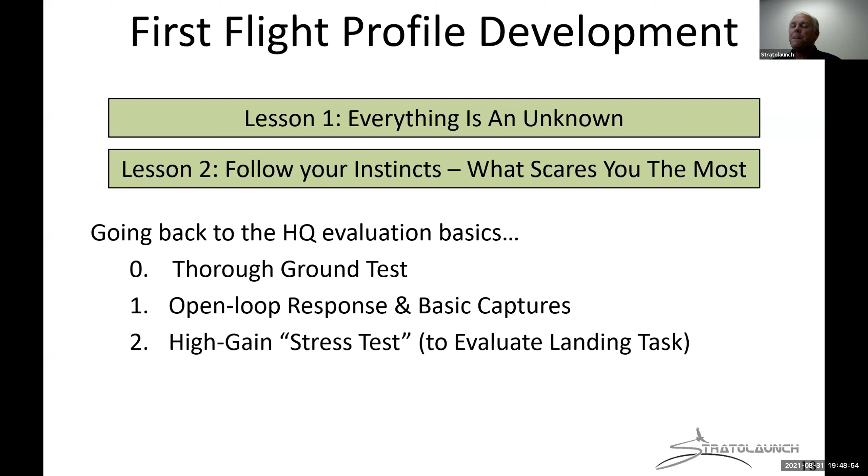So if we back up to those handling quality evaluation basics, we're going to talk a little more about the thorough ground test and building this up. But before I do that, I want to touch very quickly on how do you evaluate handling qualities. I'm pretty sure if we had a car out in the parking lot, and we handed you the keys and said, go tell me if this is a good driving car or not.

If you ask that to 20 people, you will get 20 different opinions. So the challenge of how do you standardize qualitative comments and avoid design by opinion was a major problem throughout flight test and aircraft development, really until the 60s.

It started getting much more scientific, with the advent of the Cooper-Harper Handling Qualities Rating Scale, which relies on a very tightly defined task, which is repeatable, and the pilots can train to, so that you take variation out of the loop there. And then you set desired and adequate criteria.

And then you execute the task, and then you grade it against this scale, and typically end up with 3 levels of rating. One is satisfactory without improvement - the plane's good for the mission. It's adequate with a tolerable workload, so it's okay, but it could be a lot better. And then level 3 is, well, it's controllable, but you really can't do a mission with it.

So with that background, we'll go back to that thorough ground test. As we completed the build on the airplane, which, as Mason said, was quite a task, we discovered that the pitch, breakout, and friction forces were significantly higher than the design point was, and certainly higher than any of the previous hangar or bench testing had revealed. In fact, comparing it with mil standard specifications, which break out different breakout or friction forces into level 1, 2, and 3, we were above level 3. And it turns out we were pretty much up there with roll and yaw as well.

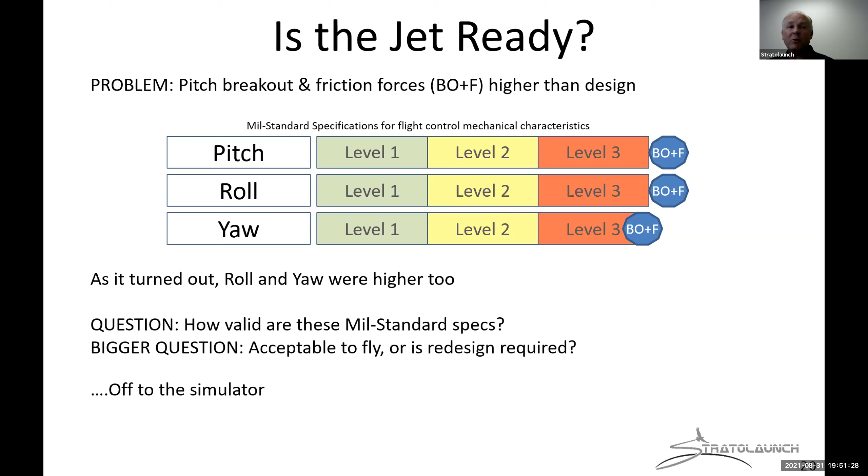Which brought up two questions. How valid are these mil standard specs? Because they are very oriented towards high performance fighter and trainer aircraft, not really a large lumbering transport. So that was one question, but the bigger question was, is this airplane acceptable to fly, or do we need to do some redesign? So now it's time to go back to that simulator that Mason talked about and find out, is this jet ready to fly?

So our objective was to evaluate the as-built flight controls for the first flight. Our handling qualities task was very simple, straight in landings. We didn't need to do any fancy offsets or anything like that. This airplane's handling qualities are difficult enough that a straight in was it. And we had a performance criteria fairly straightforward, our pitch attitude at touchdown, because we were focused on pitch at the time.

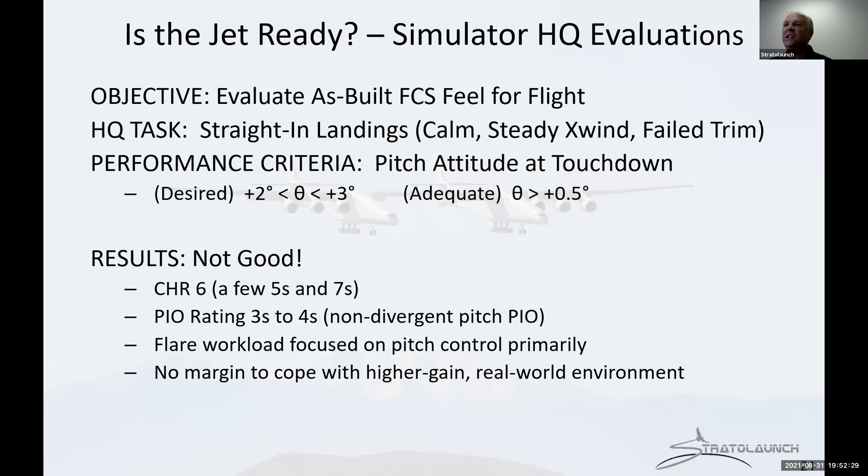Our results were not great. We had Cooper Harper 6 as our average, so we're borderline level 2 into level 3. We also saw a number of pilot-induced oscillations, non-divergent pitch PIOs. The flare workload was very high, focused on pitch, and we assessed that we had no margin to cope in a higher gain environment, which is what we'd see in the real world versus the sim.

Looking at a few traces of what this looked like. On these traces, time is on the horizontal scale. If you look at the second set of data here, that's pitch inceptor or yoke forces. The orange one is noted as pitch friction band. You can see there's a lot of sawtoothing and back and forth - that is the pilot going back and forth across this friction band. Basically, every time you reverse direction, you have to push across the friction band before you get an elevator response. And also due to a number of things, the signaling delay through the cables and all that, and the actuator is actually quite low, but the inertia of the airplane tended to lead to this delayed response. And we see here the pilot getting out of phase between pitch yoke inputs and the pitch attitude response of the airplane.

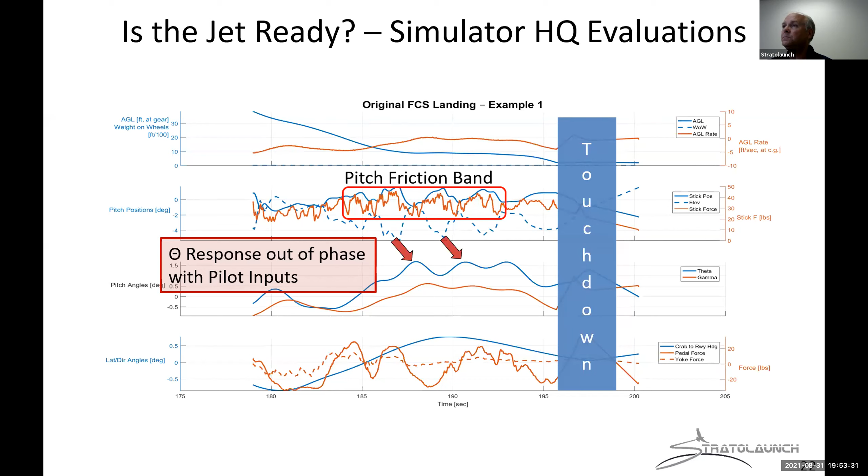So out of all this, one, handling quality simulation was very important for this flight readiness decision. We knew we had to do something different, but now the question is, well, how good is good enough? So we decided to relook at those tasks.

We wanted to give ourselves tasks where we were happy we had adequate control plus some margin for what this would look like in the real world, and sufficiently tasking to expose deficiencies in the simulator. Landing was the critical task, but we also added in some up and away single axis high gain tasks as part of a stress test.

We also picked 3 primary criteria to go after. One was runway lateral error, clearly a concern when you only have 43 feet to work with to either side, you don't want to be landing 30 feet off to the side. Having a positive pitch attitude, so we didn't touch down nose gear first. And then how well we aligned the fuselage with the runway. This aircraft, because of the inline nature of those main landing gear, we want to land with the fuselage aligned with the runway using a wing low approach as opposed to a crabbed landing.

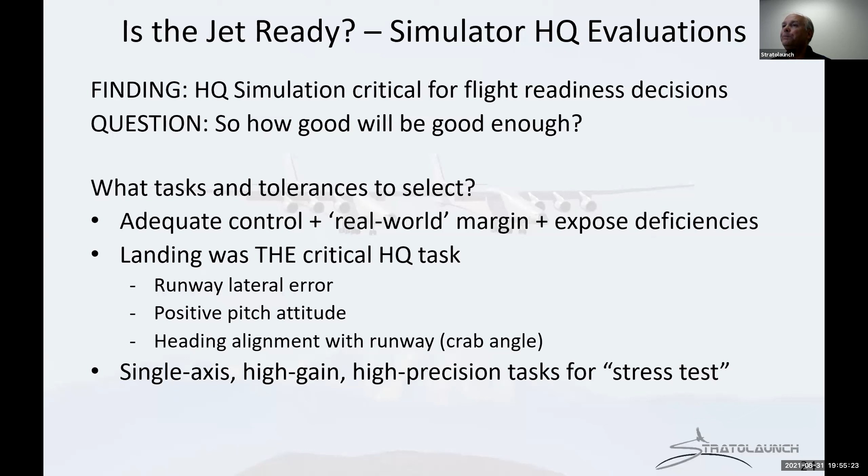So the simulator prior to this had really been envisioned as a training only simulator, not necessarily a handling qualities evaluation simulator. So we had to dive in and look at a lot of the assumptions, looking at how well we could generate environmental conditions, doing a precise measurement of the aircraft's flight control system and mimicking that in the sim, looking at ground effect, other aero effects, the actuator dynamics, the simulator visual. So a sort of corollary lesson from this was, yep, everything's unknown, but you need to challenge assumptions and models everywhere where you can.

So the result of this problem was we went back in and did a significant breakout and friction reduction engineering effort. It's a huge engineering push. The shop folks basically tore out the flight control system and reinstalled it twice, I believe. So that was one set of this to reduce those numbers.

But then we also challenged the approach and landing speed assumptions, which were built on FAR certification standards. But we're not trying to certify this airplane or demonstrate certification. We're trying to land it. And it turns out the one size fits all numbers that were in the FAR were not well suited for our aircraft. So we revised our approach and V-reference speeds.

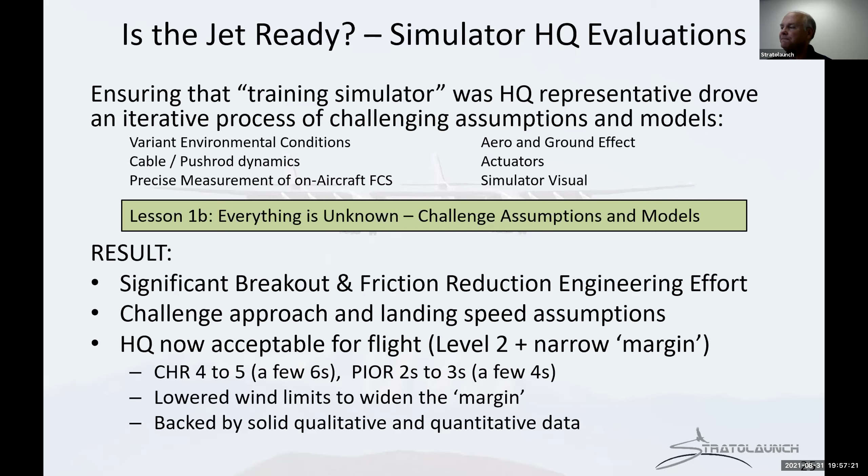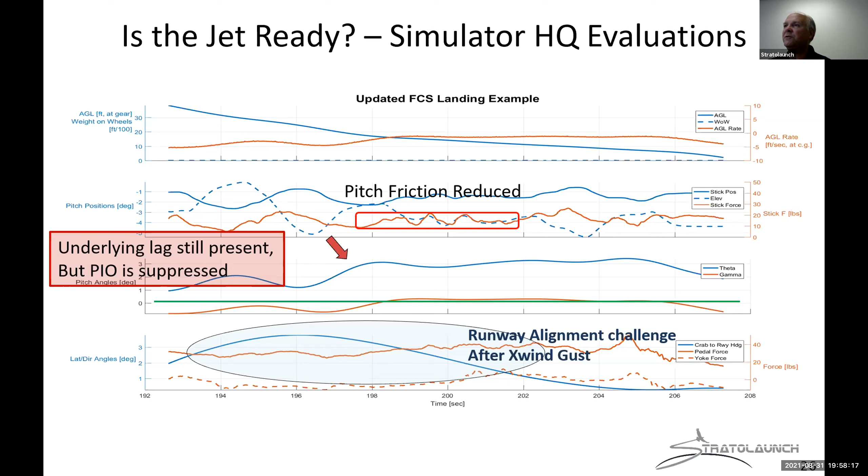So our takeaways: specs are a valuable reference, even on a unique aircraft, but you've got to know the history of that specification and what its handling quality implications are. You cannot just blindly apply it. And also, even on a big, strange airplane like this, the classic tools of handling quality evaluation work extremely well. You link them to mission requirements, add stress when sitting in the sim may not necessarily be as stressful as the real airplane. Use simple, well-defined tasks, and make sure you have a diversity of multiple pilots. The last thing you want to do is have one pilot, no matter how good they are, go in and say, yep, that's great, because they may not see it the way other pilots do.

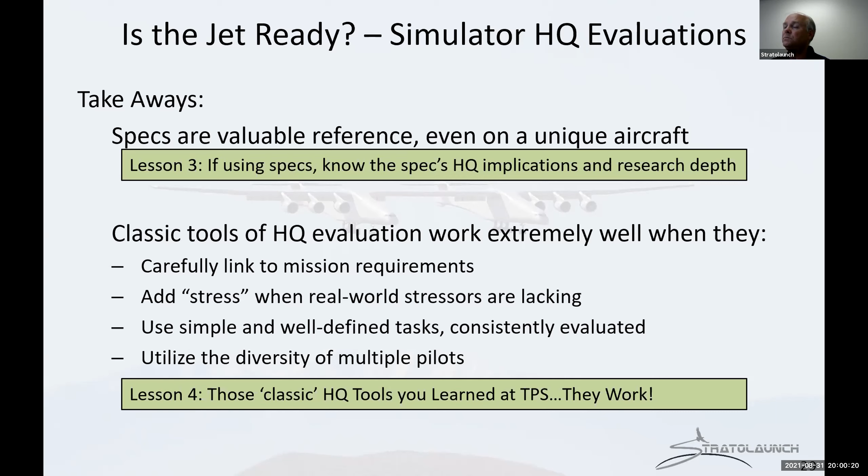Let's talk for a moment about that narrow margin, because that always sounds scary. We did some extra things to try to improve that margin by making each landing a little bit different. We were able to go into the sim and change aero coefficients, inertia, moments of inertia, control power, and do lots of landings with variations in there.

We also went and got a surrogate aircraft, the Calspan variable stability Learjet. We modeled the Stratolaunch feel system in there and went out and did touch and goes in their airplane. That was really great training, and those in-flight rehearsals of the mission flight profile just helped us keep sharp on our handling quality observation skills.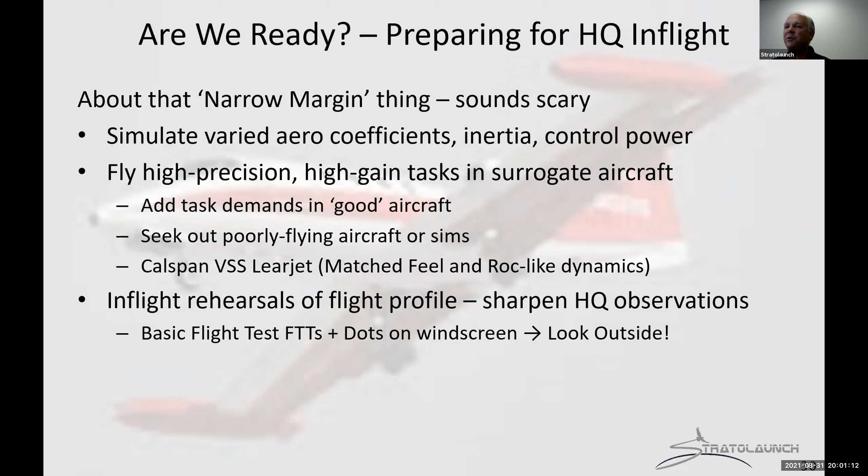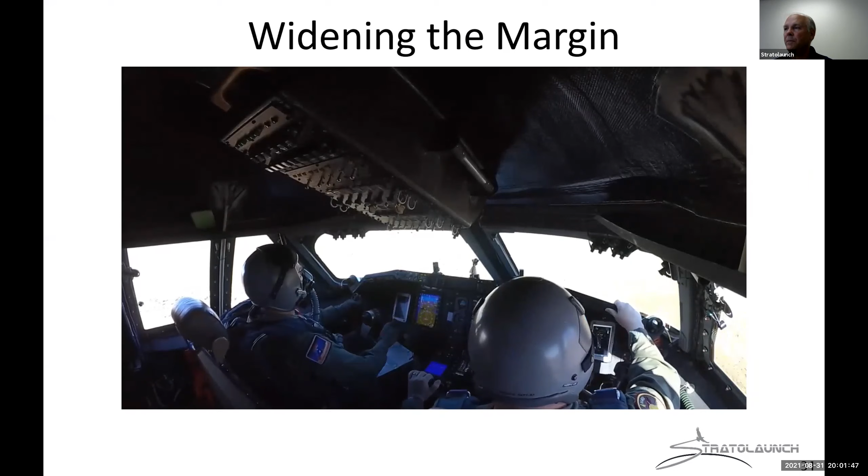So the question of whether we were ready, going out and doing those Calspan Learjet flights taught us some valuable lessons. One was we were going to have the pilot monitoring, the pilot not flying, run the throttles and control the airspeed to reduce the pilot flying's workload. We would both do handling qualities up and away to get two different opinions. And we added some standard operating procedure decision points and callouts.

We also had a full mission control room, and we did simulators with us in the sim and the control room being fed information from the sim. Not only was that to prepare the control room team, but it also taught us that there was an advantage of equipping Chase with an ability to hear the hot mic comms between the control room and ourselves.

We planned out spots in the profile to take a breath and pause and think and communicate. And just the pure value of having someone on that team who is training and thinking up disasters to throw at the team was very valuable.

All right, some of the known unknowns. It's a very large, heavy composite airplane. You could come up with things that could happen all day. We were quite concerned about a number of these, probably aeroservoelastic issues and being shaken in the cockpit, and that getting into the controls was the most significant one.

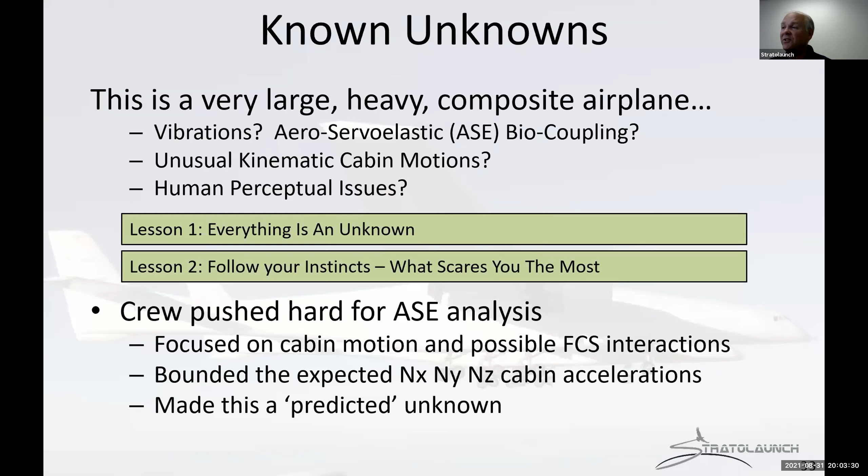So we focused on that. We pushed hard for an ASE analysis, and that analysis basically bounded some of the accelerations we expected to see in the cabin, and that helped make that a predicted unknown for us.

Another big known unknown was cabin kinematics. Again, there we are, we're out to the right, we're out in front, and there's always been a lot of concern about, well, in a dual fuselage airplane, as we roll, are we going to see an Nz, up and down G effect from rolling? And what's going to happen when we're trying to land? If we roll and we suddenly feel a G increase or decrease, is that going to make us pitch?

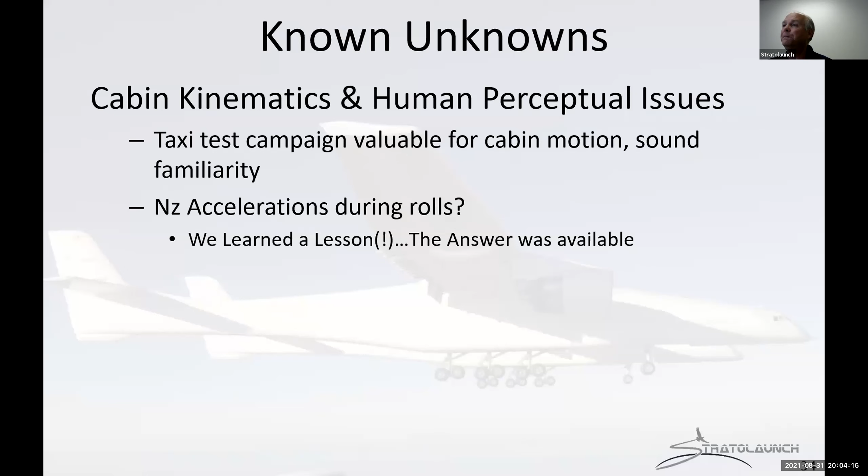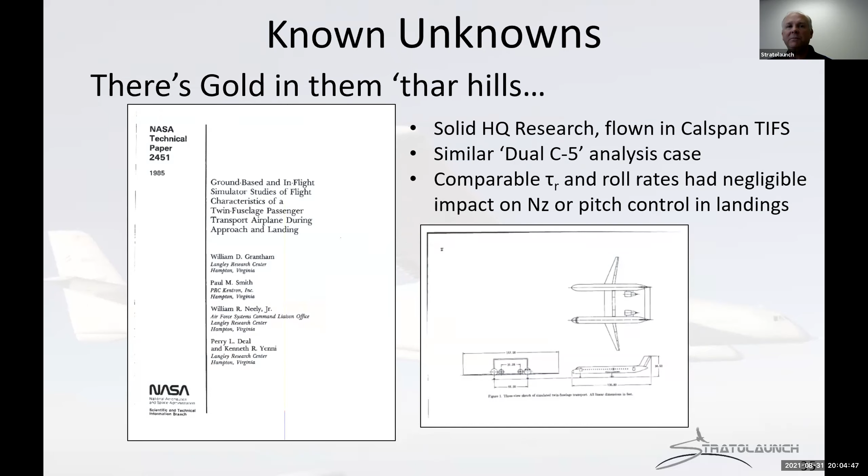Which was a concern. But we actually went out and learned a lesson before we flew, and that was to discover that answer was already available. If you remember that cool dual fuselage C5 that Mason showed you, that design had been flown in a variable stability aircraft, the Calspan TIFS, by pilots in the air. We were able to look at that NASA report and see that for a comparable roll mode time constant and roll rates, they had seen negligible pitch impacts during flare to land from this effect of being off to the side. So that was a huge confidence builder.

So finally, we got up in the air, April 2019, and it is cliche to say it went like our simulator, but it really did. It was very impressive. The pitch handling qualities were better than expected. The roll handling qualities were pretty much as predicted. We had a very long period, flat Dutch roll. The airplane just yaws side to side very slowly. However, we did find that we had a larger than predicted yaw due to roll.

So I'll show you here. I'll run the video on the left first, which is our view right outside the pilot's window. And there should be some commentary.

So if we look at that same turn from a camera back on the tail and watch the ridge line out in front of us. Here we're pretty much just on the takeoff leg, and we're just starting the roll. You'll be able to see that as we get into just a slight bank angle, a lot of yaw rate develops as that side slip effect kicks in.

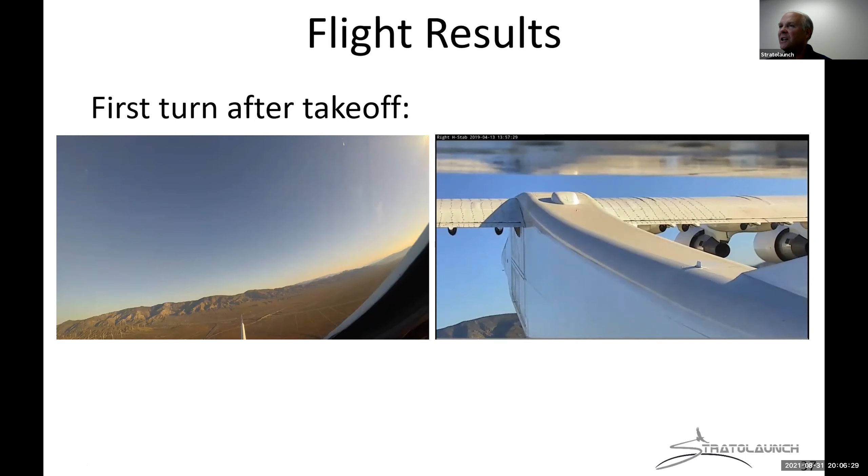So we had this larger than predicted yaw due to roll. After the flight, we realized our yawing moment coefficient due to roll rate was significantly different, significantly larger than predicted. It's normally negligible in most airplanes. It is not negligible in our airplane.

And the second big thing was landing flare perception. We talked about the roll and pitch. What we didn't realize was that a slow yaw rate with us way out in front was going to seem like we were getting pushed sideways rather than yawing. The reason that was an issue is because if you're in a wing-low approach and you're getting pushed to the left, you're going to bank to the right to correct it. But when we would bank to the right, that would increase the yaw rate to the left, which would make us feel like we were moving further left, which would make us bank right more.

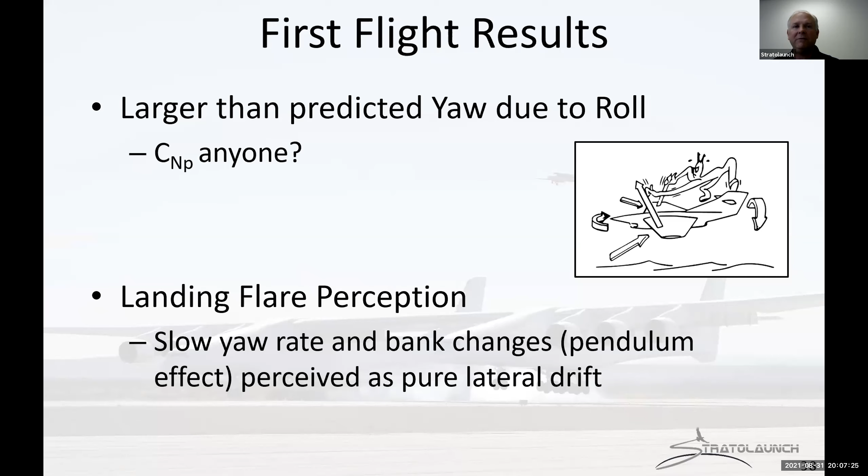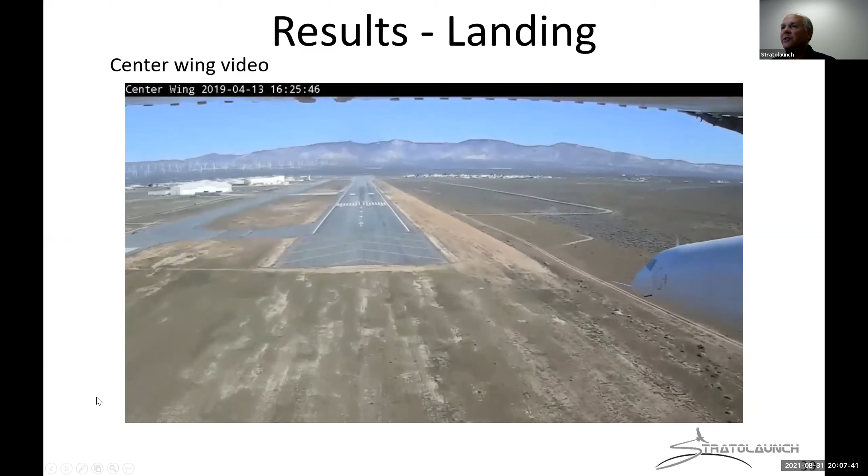And here's a view from the center wing. This is a camera mounted right in the center wing. Back that up. Of the landing—this is the first flight landing. So you can see the bank going in there for the crosswind we had coming from the right-hand side, and we've got a slow yaw rate to the left going on as we touch down.

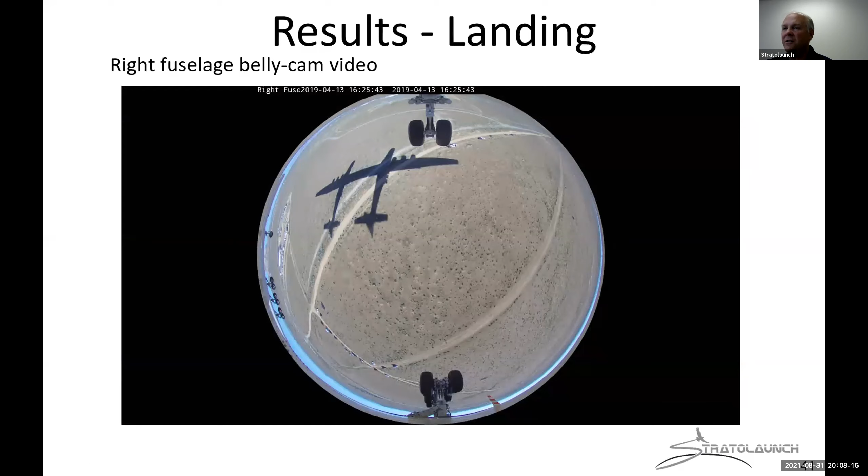The in-cockpit video, I think I'll skip this one—it's just a continuation of the last one, just in the interest of time. And then this one's always fun to watch, the belly camera video. You can see all the people who came out and were parked there short of the runway for the first flight. It gives you an idea of the size of Stratolaunch coming into land. And mains and front touchdown.

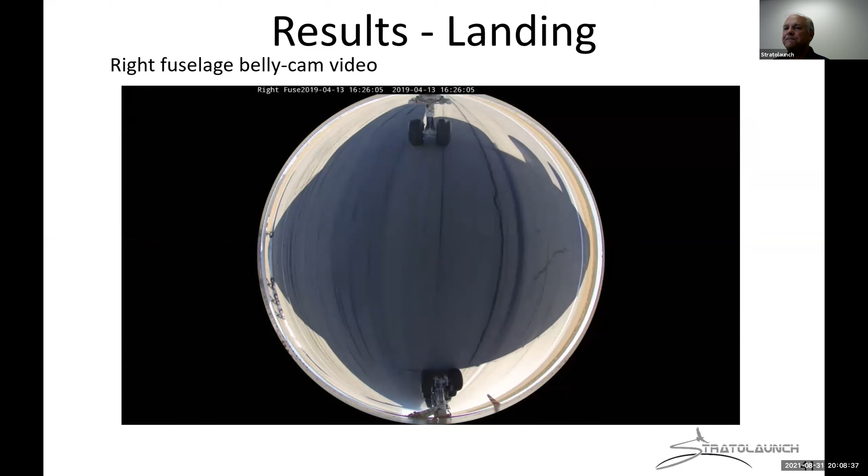So some of our innovations that helped us on first flight: we had hot mic between the crew and the control room in both directions, and then hot mic reception in the chase aircraft, so they were able to completely keep up with what we were doing with the test cards. We'd adapted AOA indexers to be pitch attitude indexers to ensure that we would not touch down nose first. We had dual band and dual path telemetry for redundancy—that'll help out later with our hypersonic mission.

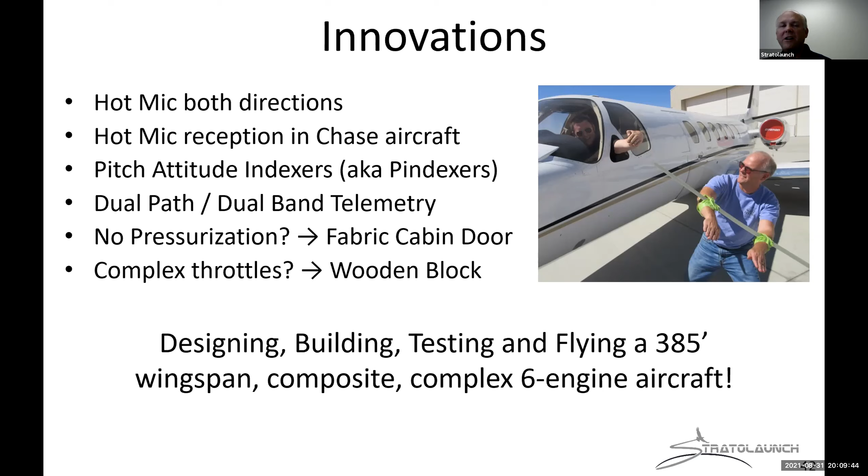We did not pressurize the fuselage on the first flight, and in fact we ended up going with a fabric cabin door, which sounded crazy when the engineer first proposed it, but it actually worked great. Mason showed that picture of the complex throttles—we actually used a wooden block to help keep those aligned in flight. And of course, the biggest innovation was designing, building, testing, and then flying a 385-foot wingspan composite complex six-engine airplane.

Our second flight objective: it had been two years since we flew previously, so we wanted to land safely again, and hopefully have a better landing. But we'd also made some changes. First, we had changed the outboard aileron control system. We added a yaw augmentation system, added a runway alignment device for the landing, and then we wanted to go out and test our flutter instrumentation and techniques. Our risks: we still had that runway departure on landing, but some of those other risks were now knowns and not present, so we could take them off the table.

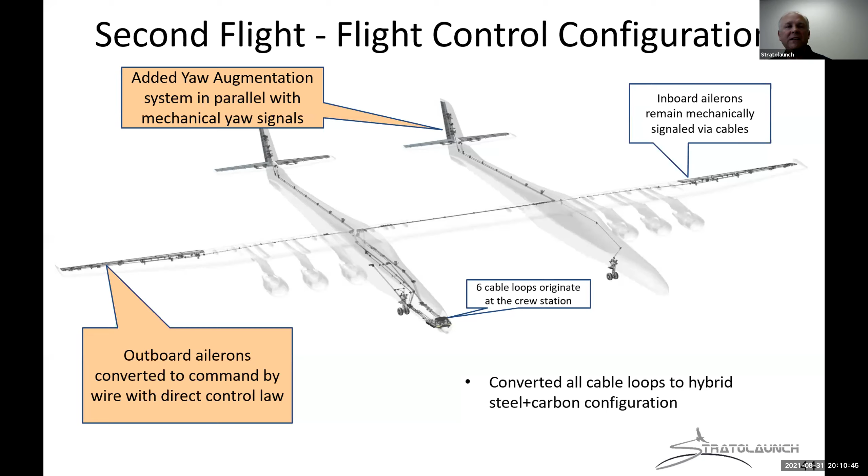So the two biggest changes in the flight controls: the outboard ailerons—we essentially snipped the cables and turned those into command-by-wire with a direct control law from the yokes—and then added a yaw augmentation system in parallel with the mechanical yaw signals. We also converted all the purely steel cable loops into a hybrid steel and carbon configuration.

So our second flight results, all systems again performed very well, as complex as they are. It really is amazing that we've got two flights on this airplane with virtually no significant write-ups for maintenance.

The outboard aileron functionality worked perfectly throughout the flight. We actually went ahead and turned them off and evaluated the handling qualities in that failure condition, and that all went well. We got our flutter assessment in, and that was successful.

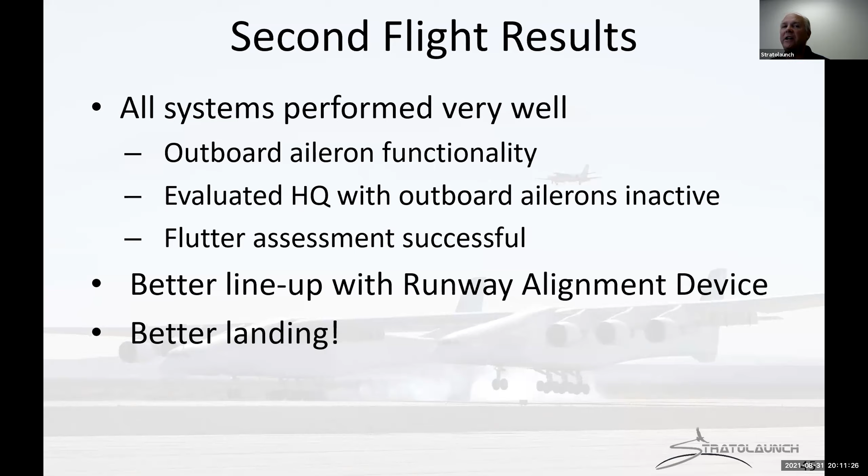We had a better lineup with the runway alignment device and a better landing, which made me very happy. And here's the video of that second landing, a little bit longer on the lineup.

As you watch this video, you can see the underlying very slow yaw. It's really only a half a degree to a degree, but it's very hard for the pilots to suppress that and stop it. It's almost imperceptible actually in the cabin. You can see the bank changing as I'm trying to adjust the lateral error as we come into the runway and make those fine corrections.

Everything's looking pretty good here on the lineup. Again, we're banked slightly to the right for the crosswind coming from the right.

And we have a nice touchdown, airplane's rolling pretty straight. And then as we get on the brakes, they're quite powerful. The differential brakes are very good for steering, but because they're strong, we tend to get a little bit of wiggling as we come on the brakes. And that's what you see right there.

All right, I think we probably ran a few minutes over, but that is the conclusion of my portion. I think if we can open up the floor for questions, or Ken, whatever you'd like to do next.